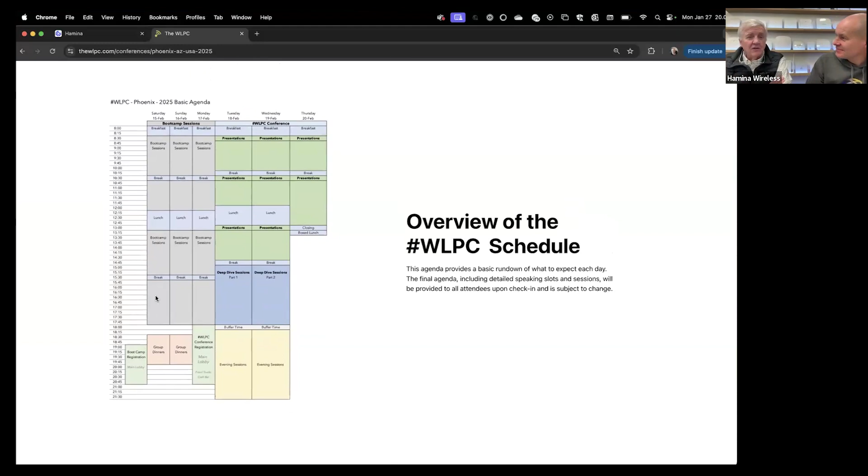Oh, WLPC, excellent. That schedule is not right, but anyway, it's just the generic one. But it's essentially a 6-day conference, boot camps on the first 3 days, and then 3 days of full-on conference with deep dives in the afternoon and lots of events in the evening, including a Hamina event in the evening that will be a better deep dive into the things that UC does. He never releases new information, but maybe he might this time. Yeah, never happened before. So we'll actually have a surveyor bake-off, like who's the most efficient surveyor type of competition during our evening event.

I should bring my Segway. Oh, dude, isn't that cheating though? You totally should though. Yeah, if you have room. You could bring Joel's scooter. Oh, Joel totally should. The pink scooter. No, I can't. That's my daughter's. Oh, okay. Yeah. She'll be mad. Oh man, yeah, we won't do that.

But yeah, Hamina has a boot camp, one of the 3-day boot camps. Do we? Yep. Yes, we do. Eddie Ferrero's teaching the boot camp, his first boot camp as well. And then we have a deep dive. We actually have 2 different ones. Jerry Alla, featuring the rest of the Hamina crowd, will be doing one, which is like the standard Hamina power through, and then Peter McKenzie will have different survey methods and mixing and matching them using Hamina. And seeing Peter's, it has some more advanced features too, so looking forward to that one.

So should we start with those tips? Because we're already 5 minutes in. Well, that was actually many tips. We can count those. Those count. The conference is totally a tip. And why? Get in early. That's a good tip. Yeah, absolutely. Here's another one. If you're going to buy stock, buy low, sell high. That doesn't sound obvious at all.

Not at all. So yeah, I think I've seen this floor plan before. Oh yeah. In one of your webinars, maybe. Probably. So first thing you mentioned today, maybe requirements. Could that be something we should work off of? As a good tip, make sure you know what you're designing for, but not just the simple requirements that you see here: primary, secondary coverage, co-channel interference, how much you don't want it, but like which AP are you going to use? Yep. Like, I think when you design here, you should use a generic AP, not. I was gonna come to that. So for secondary, we have a pretty strict limit of -67. What do you like to use?

Actually, while we're here, a tip is if you have secondary, it helps with voice grade devices and helps with roaming. But if you're near the edge, the perimeter of your building, it's okay not to have secondary there because no one's walking through the exterior wall. Exactly. So don't think it has to be 100% coverage. Think of maybe a couple meters or more around the perimeter doesn't need secondary. So don't overbuild just to get the secondary fully to the corners.

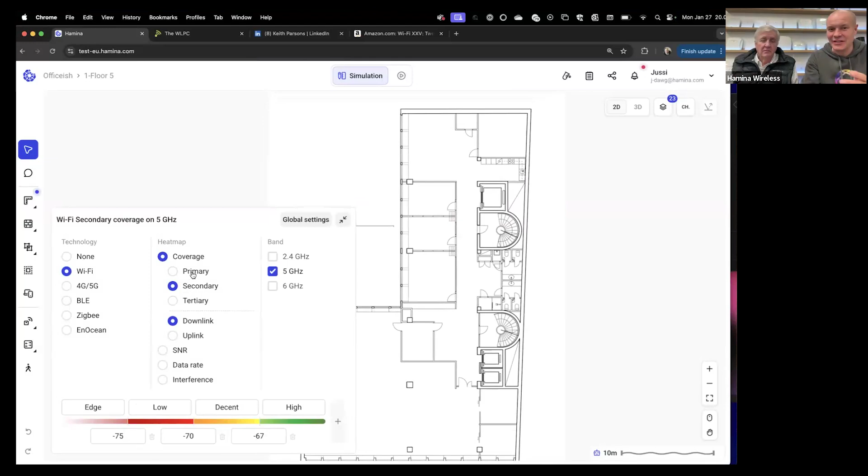And the secondary coverage obviously means, whereas primary is the strongest access point signal, secondary is, can I hear two signals, and at what signal strength the weaker access point is audible, right? And I like that you added tertiary, because if I see tertiary, it gives me this warning that, oh man, I'm going to have trouble with co-channel interference. Yep. Because if you have -65 tertiary, you probably have too many APs. Probably, certainly if you have all 2.4 radios enabled, then it's inevitable. Definitely.

So should we count that as a tip? Yeah, turn off 2.4 radios. Yeah, at least most of them, or at least some of them. All right. Oh, you want these tips to be truthful. Oh, they can be sarcastic too. Okay. I mean, either way.

What about wall materials and things of that nature? How do you like to measure the wall materials if you can go on site and spend time with that? It's pretty easy. You have something that makes RF, and something that measures RF. You put the maker on one side of the wall, hopefully about 4 meters away, so you're out of the free space path loss curve, so it's getting a little flatter. Take a measurement on one side of the wall, take a measurement on the other side of the wall, subtract. Maybe take multiples along the way. Sometimes there might be something in the wall that you can't see. So if you take multiples, you'll get that worked out.

A good tip there is don't use a phone for doing the measurements, because when the phone is listening, it's usually scanning all the channels. What you really want is something you can lock on a specific BSSID, or at least a specific channel, so it doesn't roam to other channels. You get more data quicker. Right. Beacons come out 10 times per second, so if you have it focused on that, you'll get at least 10 data points per second, and then the averages work out a little better.

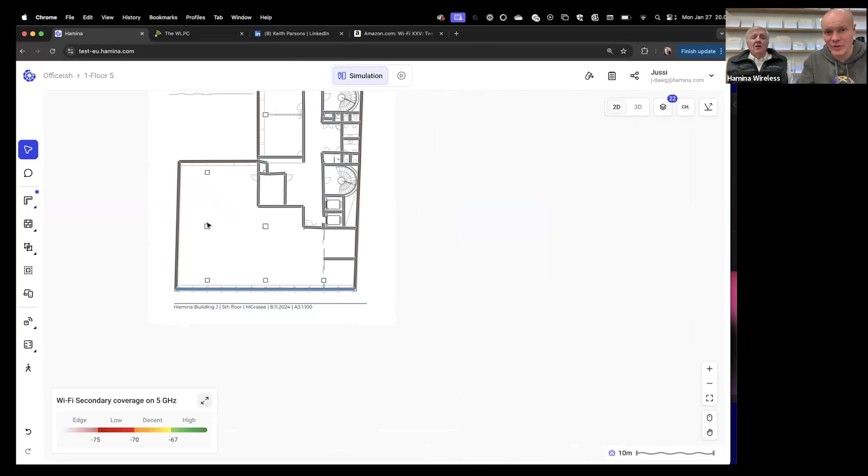There you go. And so if you cannot go on site, if you cannot do the wall measurement, what do you do? At least there's some rules of thumb. You can guess. And I would guess high if I was going to guess. And then I also like to guess low. If anyone's ever been in photography, good cameras have the ability to hold a button down for bracketing. In a camera, it changes your aperture or your speed, but basically it changes your exposure, up one stop, down one stop. When I'm doing designs and I don't know for sure what's in the walls, I'll bracket the RF attenuation of the walls. Usually the thing you have most of, which in a lot of office buildings is drywall.

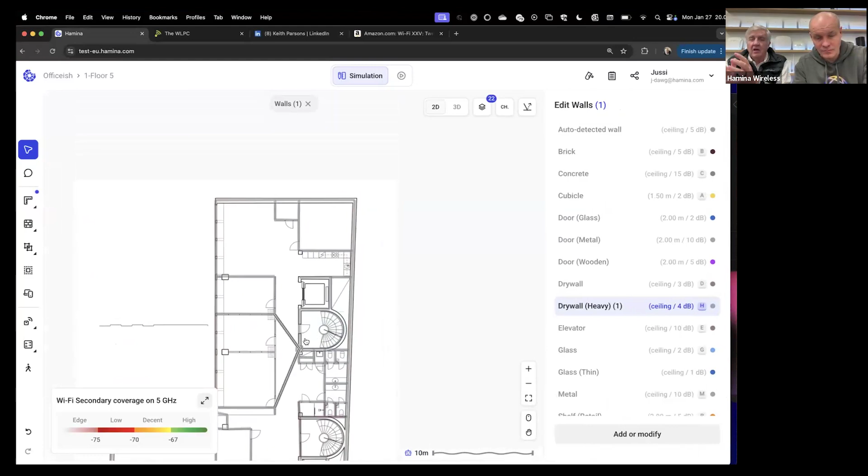And then I'll take it from a 3 to a 4 to a 5. And I don't want it to be too high or too low, because if I set it too low, I might have too few APs. If I set it too high, I might have too many APs to get past that issue, but then my co-channel interference goes up if it actually isn't a 5. So I use bracketing to get an idea of how sensitive my design is. It shouldn't break if I move it up 1 or 2 dB on the wall, and it also shouldn't break if I go the other way. So bracketing on your wall attenuations.

If you can measure, it's all better. I will just say right here in front of everyone, and you can agree or disagree: it's not always a 4 on the drywall. It's not? Amazing. So you can use it as a starting point, but it's also not there.

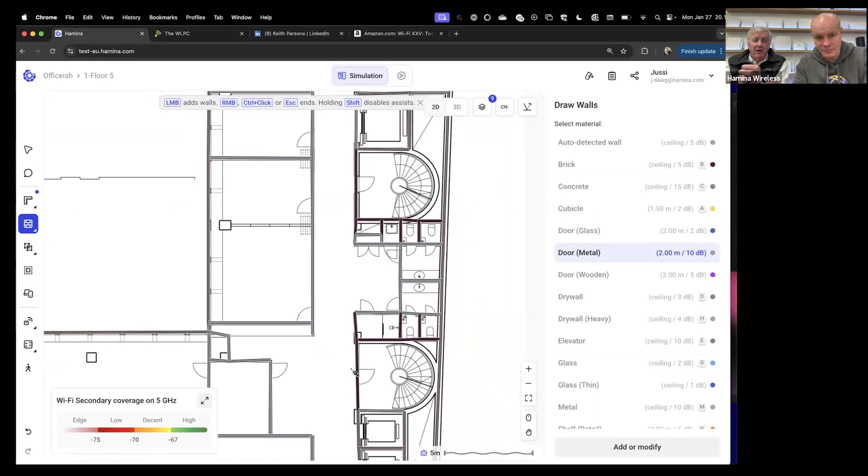Another good tip when you're doing these designs: treat your exterior walls differently than your interior walls. Even though you might have an auto wall and it brings them all in at once, treat the load-bearing walls different. The bathroom walls are different. Elevator shafts obviously different. Stairwells are different. So don't just have one wall type for the whole building.

Or you could just hire Dan to come in and draw all your walls and furniture. There you go.

Keith, can we ask a question from the Q&A tool? Yes. Okay, so David Stone asks, can you speak to insulated metal panel walls? I didn't see it on the list. What should I select?

When I talk to insulated metal walls, they don't answer. That was for Anders. I just did your dad joke for you. There you go. That's the useful advice we get from this webinar. And this webinar is done. Thank you.

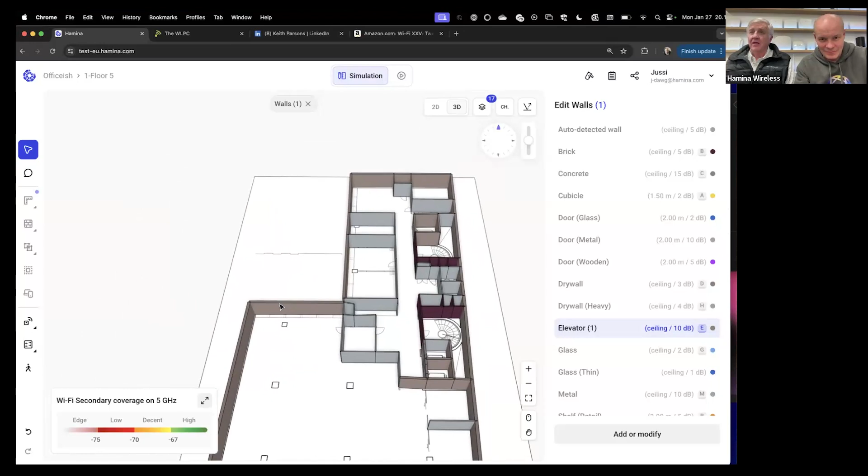I've worked with different panels of different types. I've seen them as low as a 6 and as high as a 30, a single panel. So if you can't measure it, what I do is I contact the contractor who built it or the architect who designed it. Usually the contractor is better, and see if they've used that same material in another building and go measure it there. So I might be doing one across the country and I don't want to fly there. I'll just find one local and test it. It's better because the range is so different. It will totally change your design.

You run across the same kind of things if you're in hospitals with radiation, and sometimes hospitals where they moved the radiation clinic to a different place, and they didn't take out the walls. So good to find those.

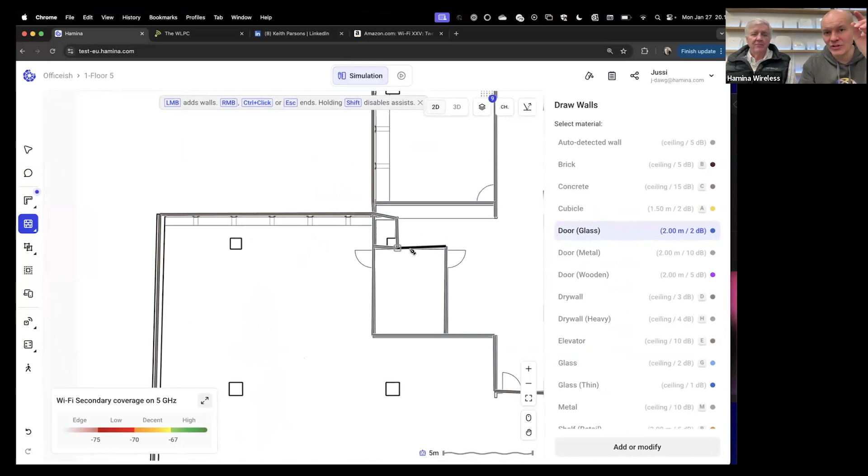And I like to use pessimistic values for walls. Especially here you can see that people typically don't draw things like kitchen furniture or bookshelves, stuff like that. They do attenuate it quite a bit. So being a bit pessimistic on the materials helps. However, reflections on the other side compensate that pessimism a little bit.

Same with columns. I've been doing this for years, and there was a time when I would draw a column, and then I would go in the real world and find the column didn't have the effect that I had predicted. So let's illustrate that. What if we do a mega attenuating column, something like 60 dB per meter, all the way to the ceiling? There we go. Let's draw a couple of those and illustrate that effect. Now we'll come to the AP placement as well.

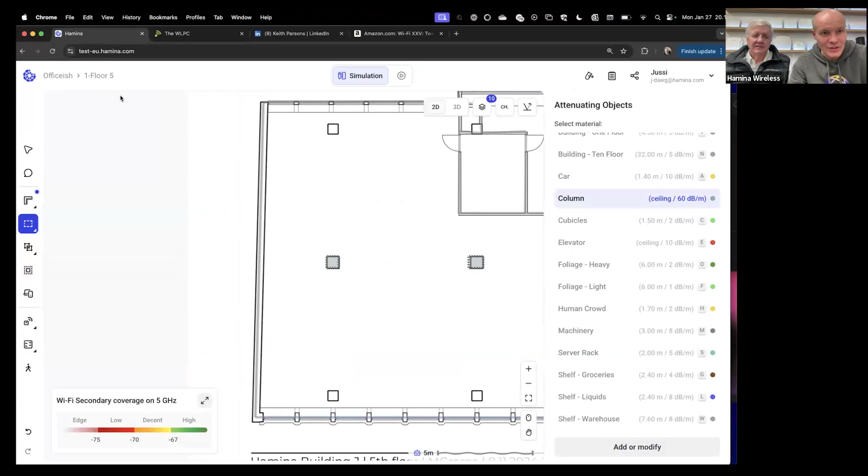So what would be our weapon of choice today? Xeris. Okay, just got me. We'll just use something Wi-Fi 7, and here we go. Show the coverage. I'm not showing it though. You're on secondary right now. Oh, no wonder.

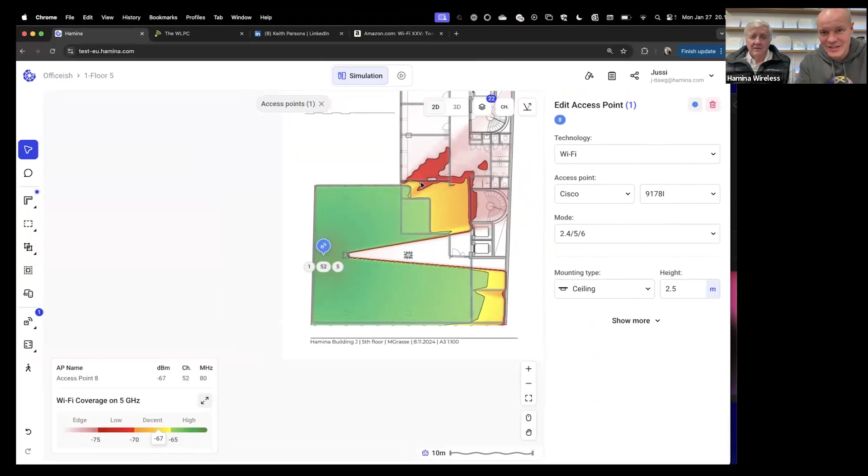There we go. So this is a not extremely realistic column, but this is what used to happen, right? And this is why we don't model columns unless we also account for the reflection. So you can see still behind the columns there's a little bit, and this is what would happen probably. To prove that your code is working, mount that AP on the column. Just to the side, like you face mount. That's what's in the real world if you mount one, even with your reflection calculation.

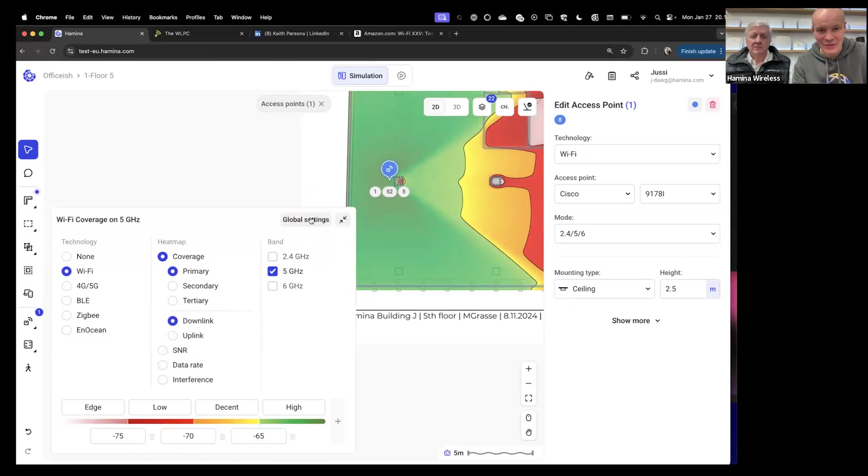So one tip is try what you do and actually do it, and then walk it, and then you can compare. Absolutely. And it also depends on what kind of environment you have. This is where it gets difficult because it's so difficult to measure reflectivity and refractions. I like the idea of reflection, but unlike attenuation, I don't know how to measure it to put the number in. So I like adding it, and some smart people have figured it out, but if I'm on site, I don't know how to put the number in.

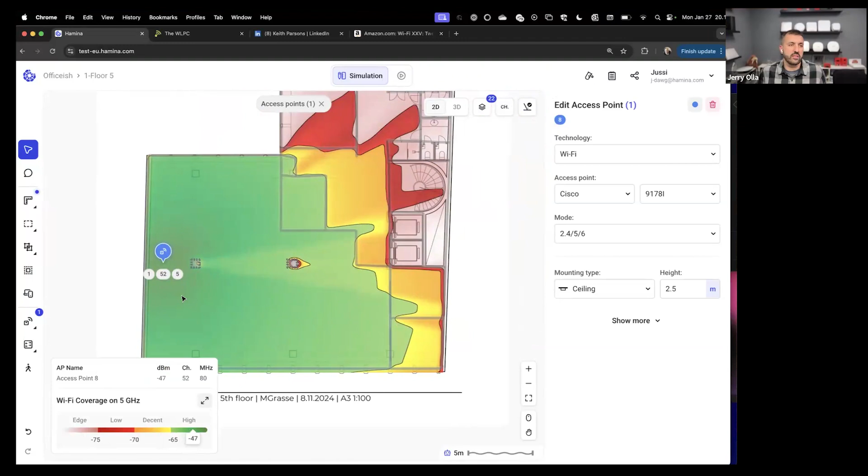So here's a bit more conservative view of that, just reducing the effect a little bit. But yeah, there we go. What I think is interesting with those is if you take that AP, put it back up against the column, and just move it a couple feet off, and then rerun that test of the reflections, notice how big of an impact it has, whether the AP is 1 foot away from the column versus 3 feet or 6 feet away. It makes a drastic difference.

It does, and this to me does reflect a reality. Ooh, nicely done. But you're right, Jerry. It does make a difference, just that little bit.

A lot of people have said, well, don't put an AP too close to anything that's going to be a wall or whatever. In fact, I was at a site last week where they said, we don't ever put APs closer than 3 meters from a wall. I'm like, so they're always in the middle of the room? And they're like, yeah, because they thought this had effect. Once you actually model the rooms correctly, you can see that it doesn't have that effect most of the time. Exactly. All right, we'll just leave it there.

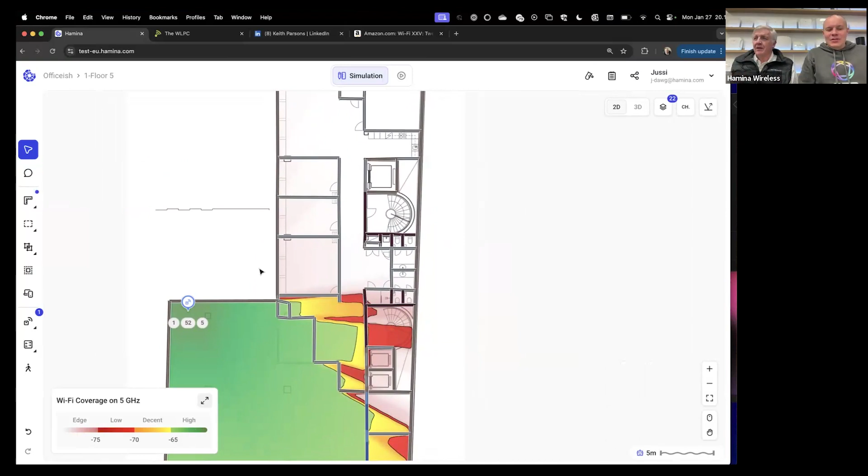Anything else about the floor plans, the walls, the structures, things like that? Yes. Jim Palmer asks, can you show us how to build custom walls in Hamina? Excellent question. Let me just get the Zoom stuff out of the way. You would go into the add modify of the wall table, and here what I like to do typically is take one of the materials that is pretty close to it and then just duplicate. Then we could put in hanging silly wall as the name. Let's make it a brick material. We'll make it fairly attenuating.

And then we would say it is actually 2 meters from the wall, so 6 feet 8 or something, and we'll make it transparent even and black. So this silly wall should be hanging from the ceiling. If you draw one and then go into 3D, you can see what it looks like. Let's take a look. Here we go. Silly hanging wall is coming up. There we go. Silly hanging wall.

Isn't that what you have your APs mounted to? It kind of is, and in reality a lot of the ceilings are like this, aren't they? They have a lot of structures and things like that. I was at the Maxi Hotel most of the days last week, as was Dan Jones, and in there it's a huge slab of concrete, and a lot of the concrete is not fully built. So in the ceiling there's pillars of concrete everywhere, and the APs are always stuck into the highest place of the ceiling, so they're not audible quite as far as they could be, which is actually probably a good thing in that environment. And you need to be able to model it.

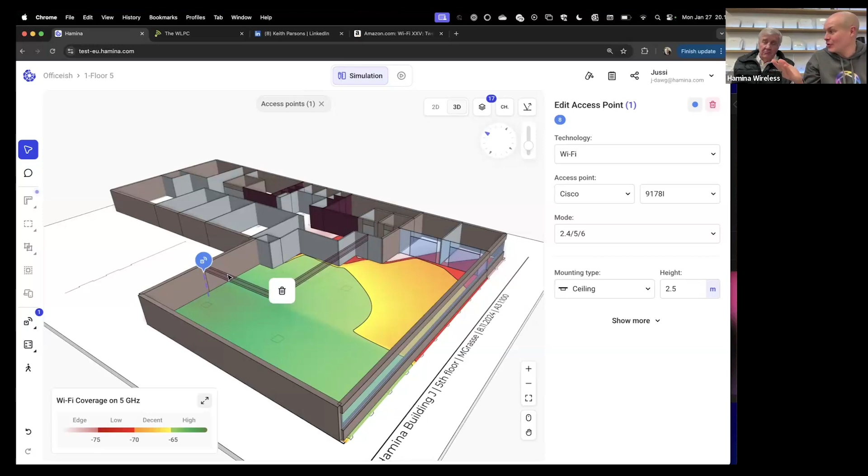Yeah. So having been here now, Dan, you need to come back, check in the office, and all of the raceways where the cables are, they're hung low, so you need to add those in your model now. That's Dan's homework. I'm on it. There you go.

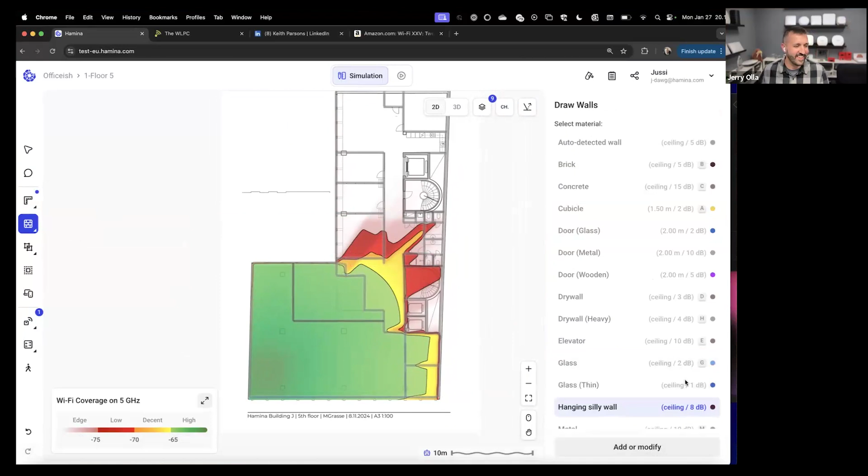Any other questions from the audience? On this topic, this is one I was just working on with some customers in Slack recently. Can you draw a lower wall underneath that upper wall that you just drew? There's one caveat; I'll let you do it first and see what you run into. Yeah, I've done this, before we had windows and stuff like that. I'll just put another second silly wall here, and I'll remember to press the duplicate button as well. So basically, it'll be an opening in between the two walls. So what you're saying is I should do this, or like this and this and this.

So top height 0.5, and maybe we'll use a silly color for that too, like dark brown or red. Here we go. And when you start putting this in here, it's great when you're editing it, but then, oh yeah, it actually disappears. We have the automatic system that takes out the other wall. So the trick, you know what to do? Go ahead. If you hold down the disable snapping, whatever. Yeah, exactly. Now I recall.

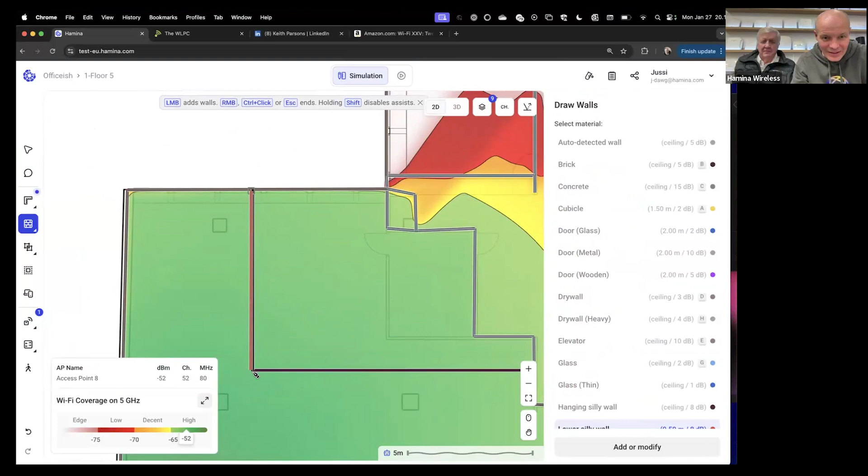Yeah, and there you go. I'll just disable snapping and put them fairly close, but not at identical locations. Hopefully I managed to do that. Yep, exactly, and it worked. There's a power user tip for you. Absolutely. Thank you, Jerry. Add that to our tip counter.

And luckily you don't need to do that with windows or doors, because if you use the window or door material, it kind of fills in. You can see how to do these also in the wall editor. It fills in this top of the door with the material that's closest to it. So it does try to have these smarts.

Same with the windows: you only put in the window material, but it fills in the top and bottom materials with the nearest and thickest material that's close to it. In that case, you could have made a window material with a dB loss of 0, and it would automatically be filled in, if the attached wall was already there.

Yeah. But essentially, here, if you say fill top and bottom and you leave one of these out, it fills the top and bottom with a nearby material. So it tries to be smart like that.

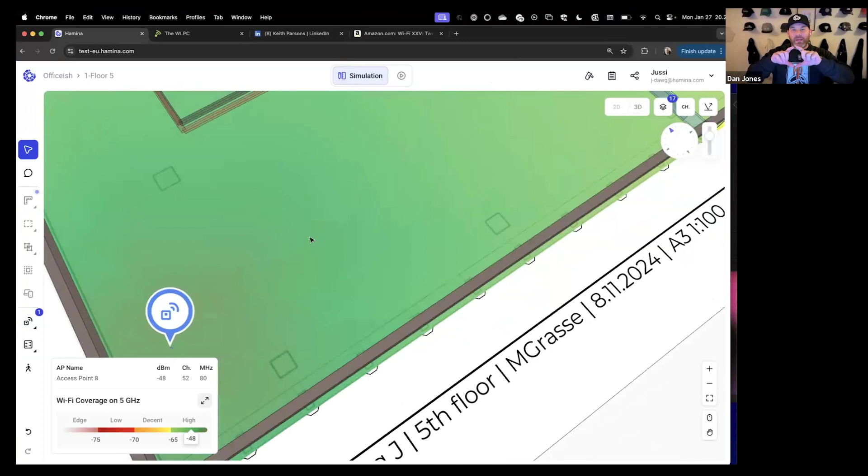Oh, the other thing that I've done as well is if you've got a space where you're trying to design screens, where they've got screens everywhere, actually do the reverse of that. Have a wall that's just floating in the middle and don't fill the top and bottom, and then you get a screen on the wall. Yeah, absolutely. Another tip.

Okay, is there a way I can have it learn walls if I've done a validation survey? So the case where you go and survey first, and I've collected data. The data points don't necessarily know where walls are, but they do know what the RF losses are. So let's take a look at that.

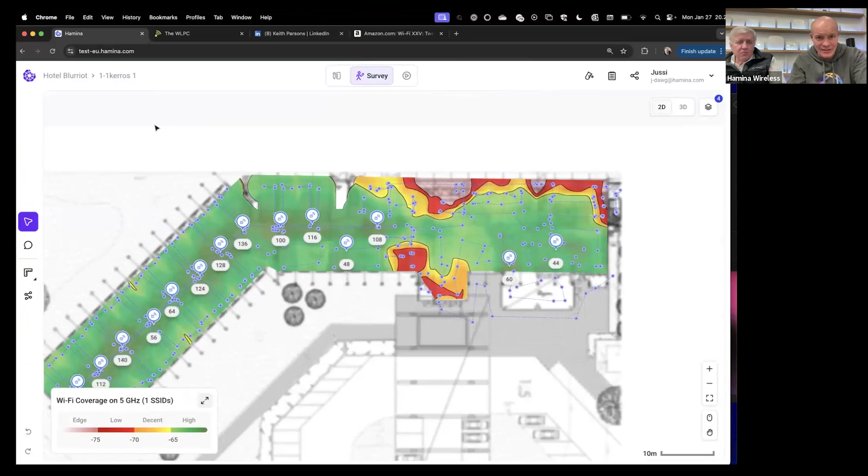So we'll go back to Hotel Blurriot, and what we've done here is just measure. Let's take the fourth floor. We've just measured this, and this is the first thing we do. Then we go out and remediate, maybe try to redesign, and sometimes it needs to happen at the site immediately too. So here's the survey data, what was actually measured, and it actually does transfer that.

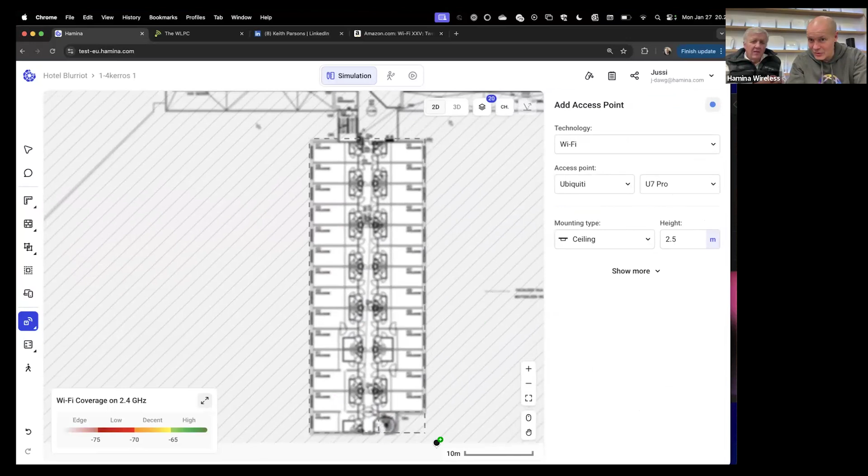Let's draw some scope zones to limit the signals first. There we go. And we'll cross out the staircase. The background is blurred on purpose. And then if we want to make a Ubiquiti network out of this, we actually can, and it automatically learned the environment based on the survey data.

So I don't think there's any walls. Yeah, there's no walls drawn here, but it does represent them, and this might not be as precise as a wall. You kind of have attenuation zones in between, but it's still better than nothing. And it is pretty accurate in the sense that this is based on the real environment, not guesses, but it doesn't learn the walls per se. It just learns the entire environment.

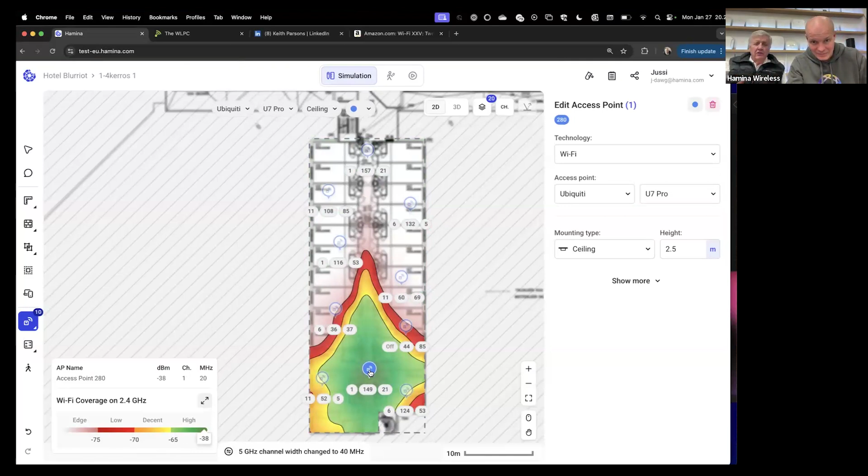Now, if only it could learn the walls automatically. Maybe we'll get that. Come WLPC Prague. Maybe. Perhaps. Who knows?

And here we can see an example, by the way, of the 2.4 disable thing. Because we have a pretty sparse network and pretty thick walls, it doesn't very aggressively disable 2.4, but it does.

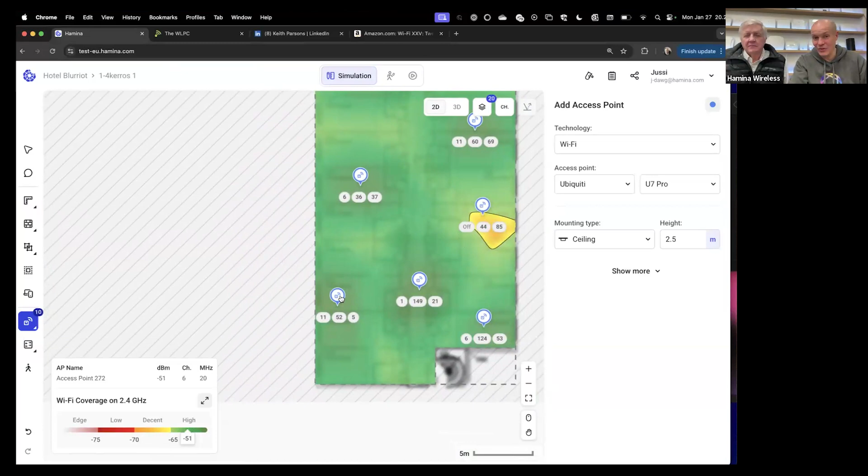So speaking of Wi-Fi tips, when you go to design your network, remediation or greenfield, what channels do you like to use? Or do you disable any of them? Like common practice, this is what I would disable in Europe, this is what I would disable in the US from the 5 gigahertz pool. From the 5 gigahertz pool, no, because whatever the APs are, they get it from the regulatory domain. Yep. And you're following that as well.

Yep. In 5 gig, I know a lot of people don't like DFS. I love DFS. They're wonderful until they don't work. And so you have to kind of stay on top of your log files to know if DFS events happen a lot, and it's not fun for the clients because they get pushed to another AP. It's not fun for your channel plan because they move around.

Then just remove those channels. Those channels exactly, only. Exactly right. Don't just turn all the DFS off because you don't want to try it. Yep. And it doesn't matter if you're by an airport or not. Somebody someplace made that up as a thing, and it's not true. Yeah. So check your log files and then only disable selectively.

I blame Andrew. What's that? That sounds like an Andrew thing, blaming DFS for things. Is that an Andrew thing? I didn't invent it. I just had to deal with it.

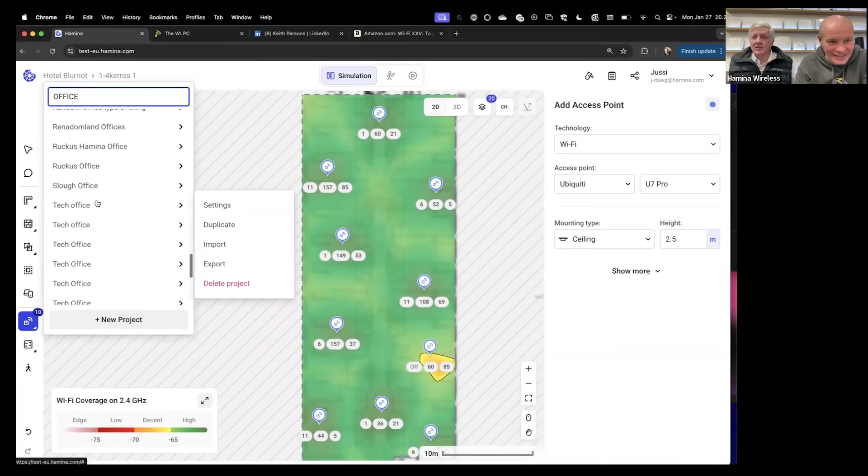Well, I understand, Andrew, if you turn them off, clients won't have that as one possible issue, maybe. But if you turn them on, it also doesn't mean that clients won't have other issues. So it's a balancing act.

What about cabling? Since we talked about these trays that go in the ceiling, how do you account for cabling in your plans? I kind of do the reverse. I like my cable installers to be trained, and I would much rather pay them to mount an AP than have a really expensive IT guy mount the AP. They're up there, they have the ladder. So I give them a little bit of training.

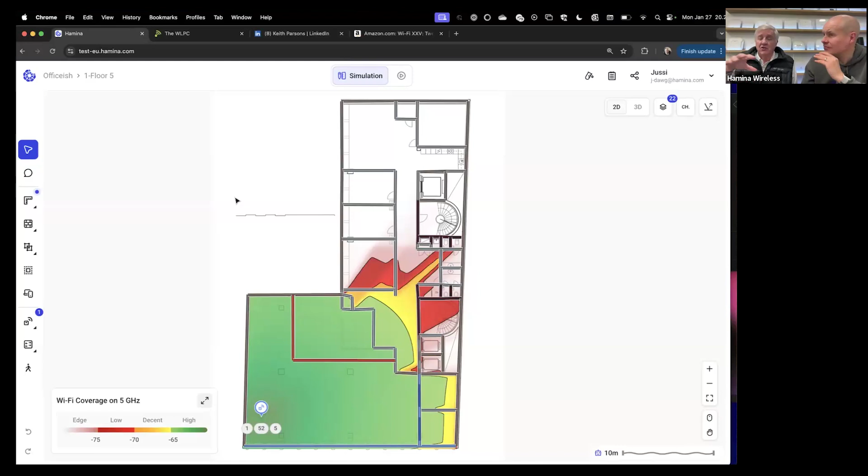For 95% of the APs, I give them some rules. It needs to be within 2-3 meters of this X, but you can move it anywhere in the room you want. And if I've designed a robust design, it doesn't matter. And then for the very few places where it has to be at this location, I can ask them to do that rather than make them do all of them. Because if you make them put every AP exactly at this perfect place,

that cable location might be extremely difficult to get to. And the cost to bring a cable to a place maybe only 2 meters away might double their cabling cost, because they have to punch through, core drill through something, and they didn't need to. So I like letting the cabler make the decision of where the actual endpoint is, but I give them rules.

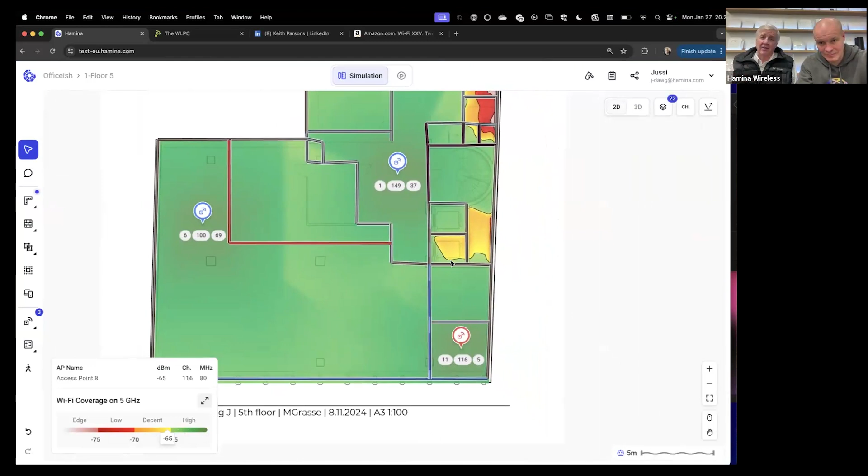Follow this rule, as well as if it's a K-12 or a university, I want them to rotate the AP and make sure that the lights face the door. So when I need to go troubleshoot, I don't have to interrupt the classroom. That's smart. So lights facing the door.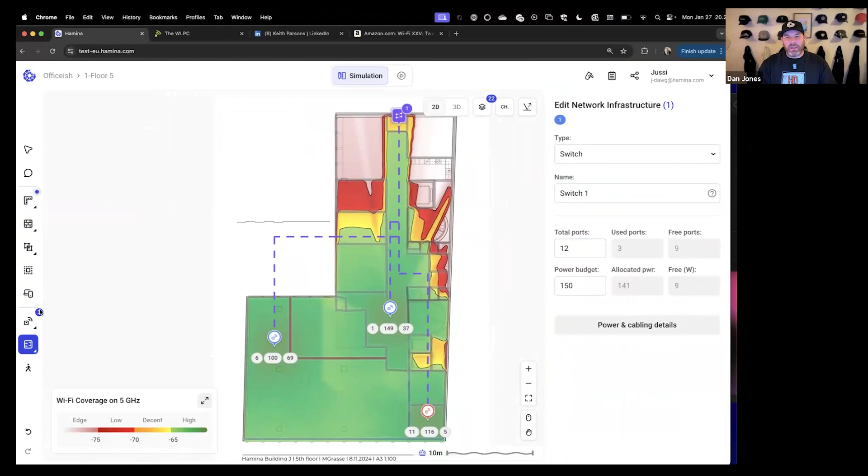So I have a really good example of this. I was helping someone with a design, and the architects had put all the cable trays in on their plans, for a building that hasn't been built yet. But where they've put the cable trays, they've gone the long way round something because presumably they can't go through a particular thing. But now the cable is like 180 meters long.

So it was really good to be able to show them, you're going to need to figure out a different route for that cable because that's not going to work. Oh, now you're going to show off your new cable tray feature. Yeah, the algorithms to actually pull these nicely and logically weren't as easy as a product guy like me would think. But what it does allow someone to do is just move the AP and the cable length adjusts appropriately.

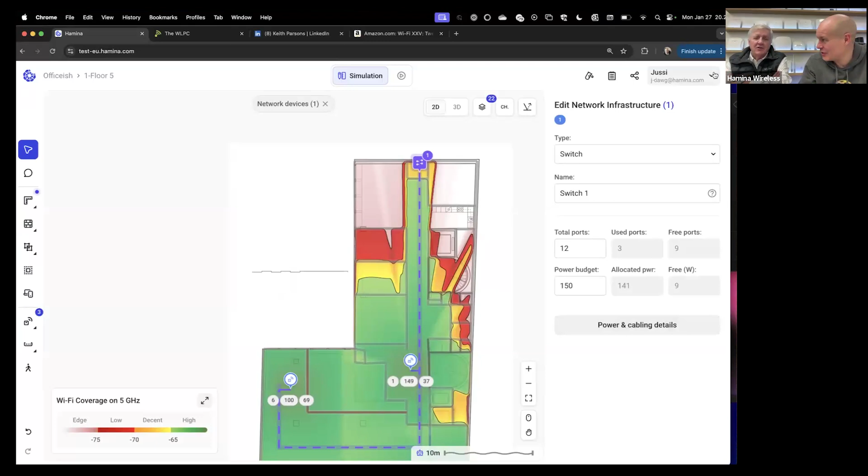Yeah. I've just found a lot of my customers don't have cable trays. If they're building a new property, yes, and then we love it. But with old stuff, you're like, yeah. Yeah, that's the shame. So this cable tool is wonderful. It helps. It's still a guesstimate. Yeah, absolutely.

And so maybe instead of 100 meters, I might only put in 60 or 70, because there's also the vertical component. You're taking part of the vertical component, but sometimes they go over, down, over, up, over, down, and it doesn't look that way on the map.

Your software thinks about the AP to wherever it's going to go, not that it has to go up and down around something. This is true. However, now let me just rename this as floor 4, for example, and we'll just clean it up a little bit. We'll just say it's floor 4, and we'll say this is floor 5, right?

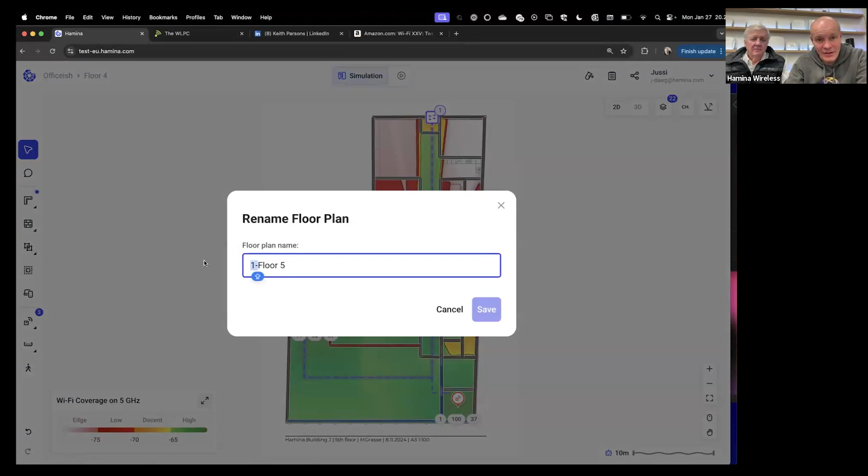I don't know if you knew, because this was pushed out. When was this pushed out? Yeah. We haven't even done a video or release notes, but it was pushed out last week or something like that, but there is now the cable riser. So you can take the... Oh, thank you.

Take this thing. I mean, I have to watch all your webinars to know what's going on. Dude, and even for us, like just today we woke up to the realization. Marketing asked, like, didn't we push cable trays out or risers out last week? And we were like, yeah, I guess we did.

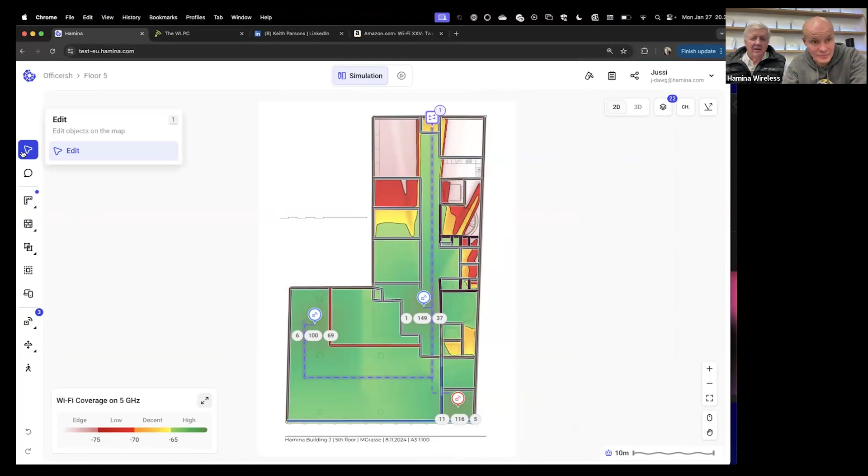So we could pull this to floor above, floor below, whatever you want. Which one are we in now? Let's clean up floor 5, and we'll just take out the APs from there. We can't. So we'll clean this up, and we'll say in floor 4, we don't actually have a switch at all. And then this guy, we say this cable riser spans through all the floors. There we go. So now, just create new ones since these were duplicated, as we start placing them.

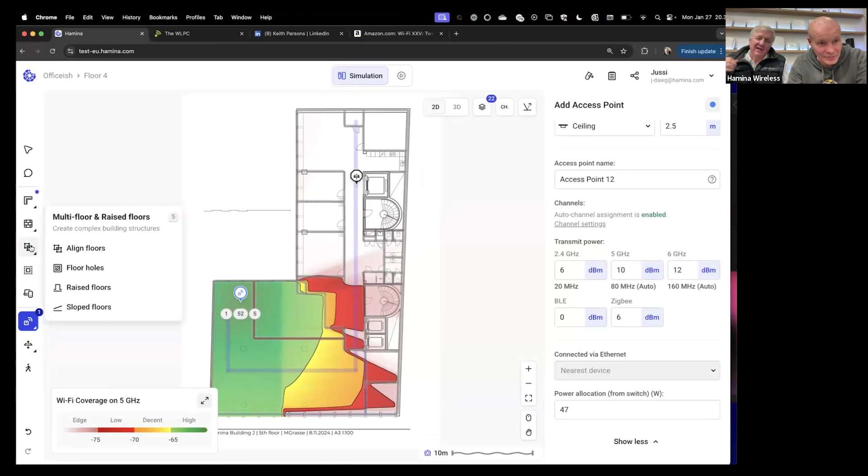You need to build the building first, don't you, see? Oh, I do need to do that, don't I? Because we don't have a switch here. Yeah, I'll just do that. That's another tip. Build your buildings first. Only then things can work. This be correct, this be correct. So from this floor 4, now we can see how the switch is on a neighboring floor, right? So the cable goes on this floor, this floor, this floor, up the riser, up, and to the neighboring floor switch.

Thank you, Dan. I got myself scared there for a while. Not that I wouldn't have extensively already used this feature, but I let you go long enough so I could see the panic rising. And then I thought, put him out of his misery. I feel very uncomfortable. And Dan, you know he is your boss. Just saying. I think in this company, it's just a justification to give me more of a hard time.

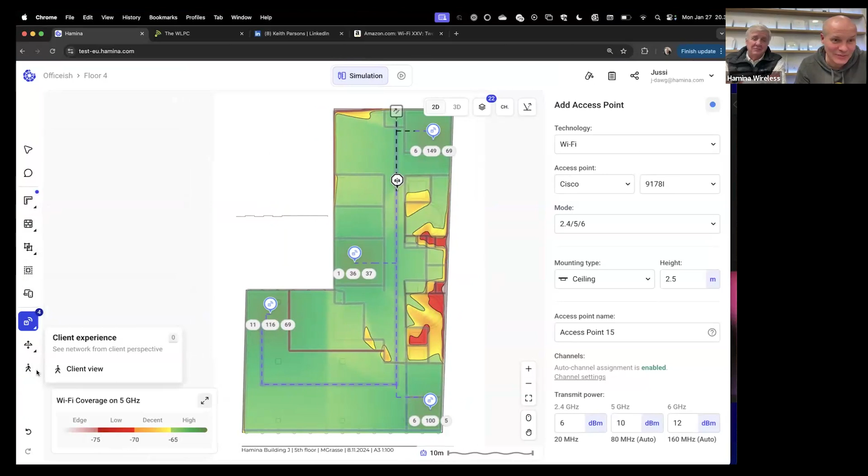But yeah, I think stuff like this is still fairly new, and it's still finding its place in the industry, and a lot of people probably haven't found it, let alone used it. But they're really useful tools for when you have a need. A lot of the tools and tips we've talked about are pretty generic across the board, but sometimes you come across situations where you need the cable, you need the switch ports, you need to say, oh, by the way, we also have to deal with all of the phones with their PoE draw, and usually that doesn't fall on us as Wi-Fi guys. And it's a nice benefit to be able to go to your customer and say, if you tell me what all those are, I'll give you a better report on what your switches need.

So going back to switches actually, how much have you done 6 gigahertz APs, let's say brownfield, switching Wi-Fi 4, Wi-Fi 5 to 6 gigahertz capable APs? Probably a couple million square feet. So how often do you refurbish the switches versus run the APs every single time? So no running 6 gigahertz APs on low power mode or stuff like that. I've yet to find people who are making that jump, at least in my customers, that have switches that can handle all the power. Okay, but it's not an option for you to run the APs, like drop a couple of spatial streams and stuff like that? Why would you do that? Yeah, only if you cannot.

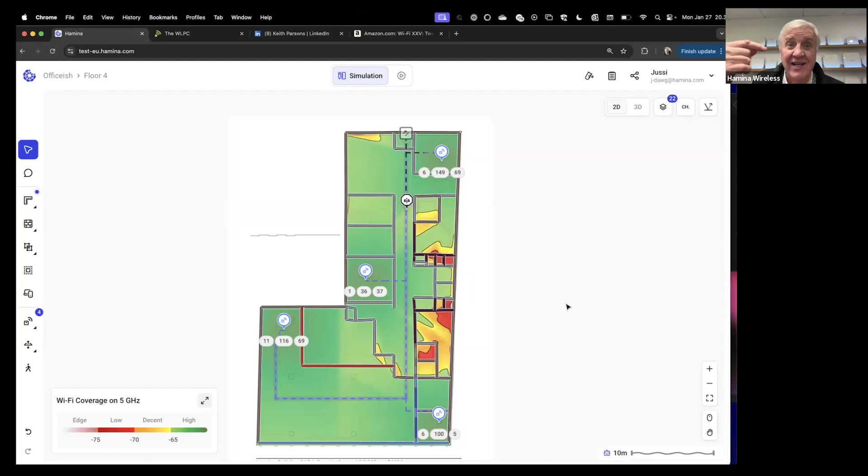You want to carry the laptop, or you want to do the surveying? I've done both. You walk and click, and I will just be nice and carry your laptop. Hello, it's me. If you see me bouncing, it's me. But you will be seeing my screen. I hope you can see it on the webinar as well. So let's take a quick status check first. Am I on two cameras now? Yeah. And we can see the utilization is decent, and all is going well.

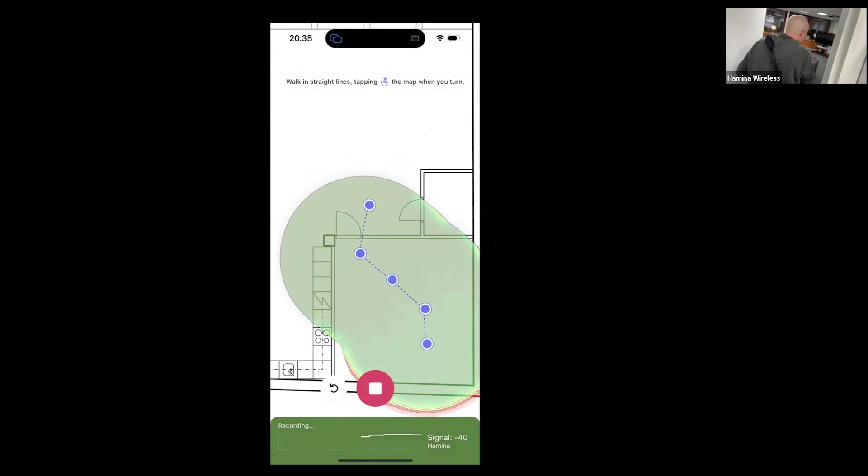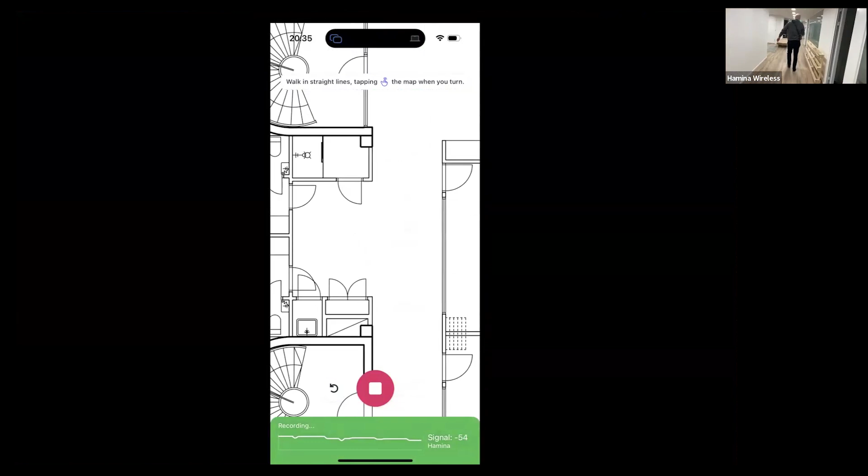All right. Has anybody ever done a live survey using two webcams on a webinar? That I don't know, but now we have. There's two of us following you around with laptops. I'm glad there's nobody at the office. It doesn't look weird at all, right? You should be used to people following you around with cameras, though, being such a celebrity. Yeah, this is true. Just another day in the life, followed by paparazzi. Do you want me to put you in the chair and push you? That's a bad experience. Is that a reference to the past? No, I would never do that. Why is there just a random pallet in the middle of the office?

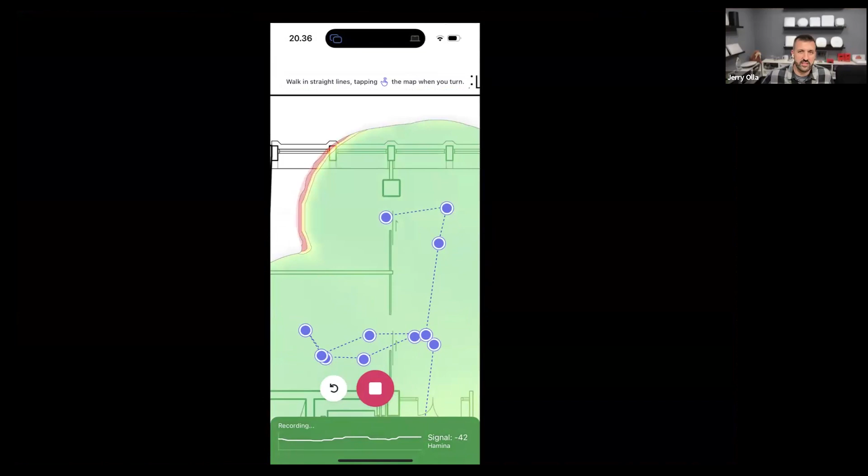Can you see my screen? Yep, still see it. Excellent. We're roaming around. How many times have we roamed now? We're getting the full tour here. Anybody have any tips for surveying? Continuous survey is definitely the fastest. Here's a question for the audience: what method do you prefer? Click every time you turn, click every time you arrive, or if you want to do it slightly more slowly, then we could take the line survey. This gives me the time to look at my bearings. Okay, there's the columns. All right, here we go, and just take one line.

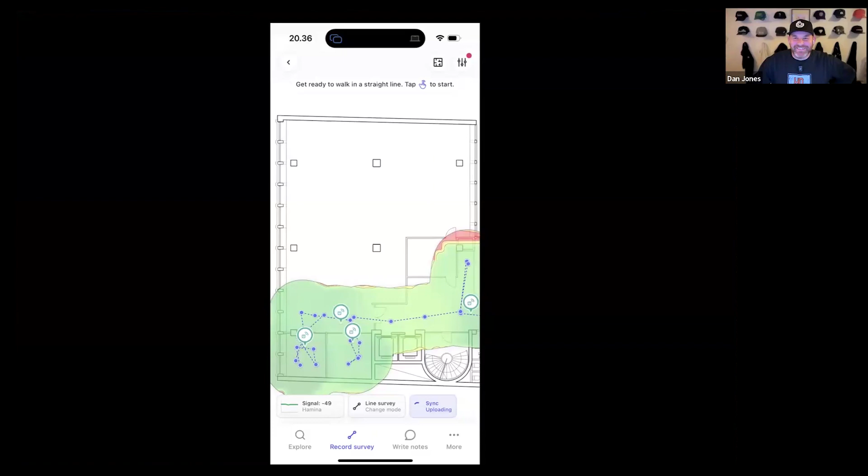Seamless roaming. Live demos, always great. We must get you over to DFS Helsinki. It's a DFS related event. Just for Andrew.

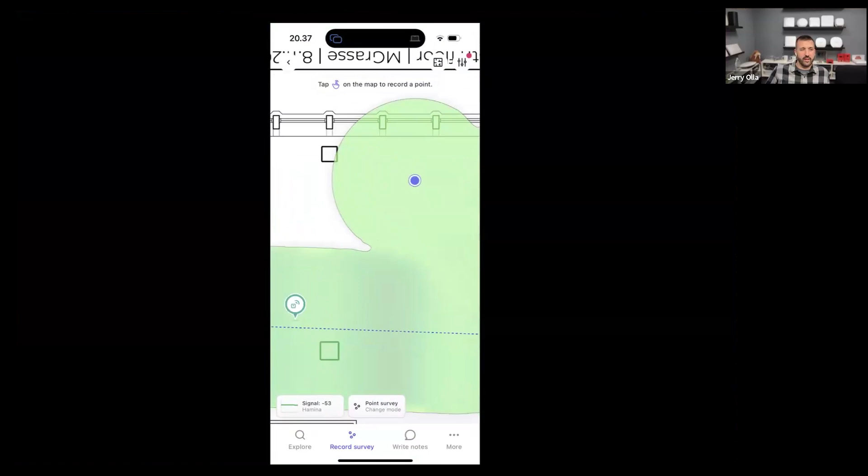And another point, see how I was changing the survey modes. First I was doing the continuous, which continuously gathered data, and now I'm in the point survey mode, which just takes one point at a time. Are we roughly here? I guess we are, and you can see the point being gathered there. We did experience a hard roam there, which I think is a good example of how laptops are not really optimized for roaming. It came back, but it was definitely a hard roam. It tried to hang on to the AP it was connected to as long as it could before it was forced to.

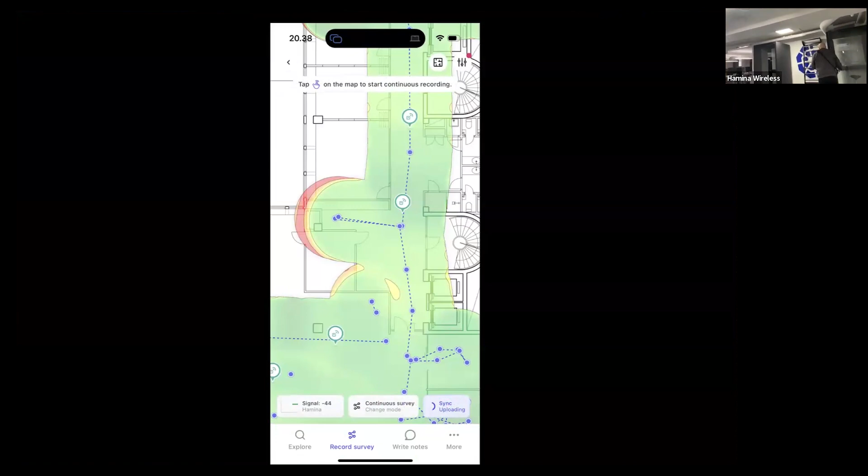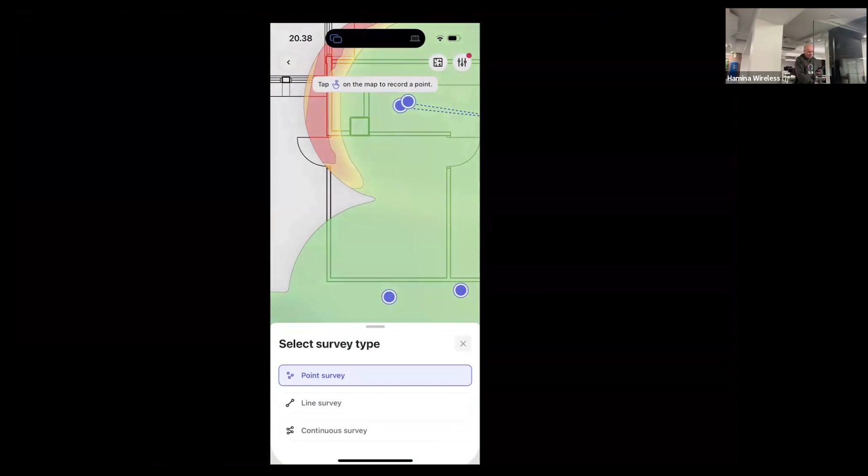So what do you guys use? Keith, what do you use as a survey method? Is it continuous? I like continuous because it's how I've been teaching people for 15, 20 years. It's the fastest and collects the most amount of data, but it also means you have to know what you're doing. It is the fastest. I like to use points for these kinds of places. Point survey is the easiest to teach someone else. Lines are someplace in between; it does take training, not as much as continuous. But continuous, I think, is really pretty easy. You just click where you start, click when you stop, click when you turn.

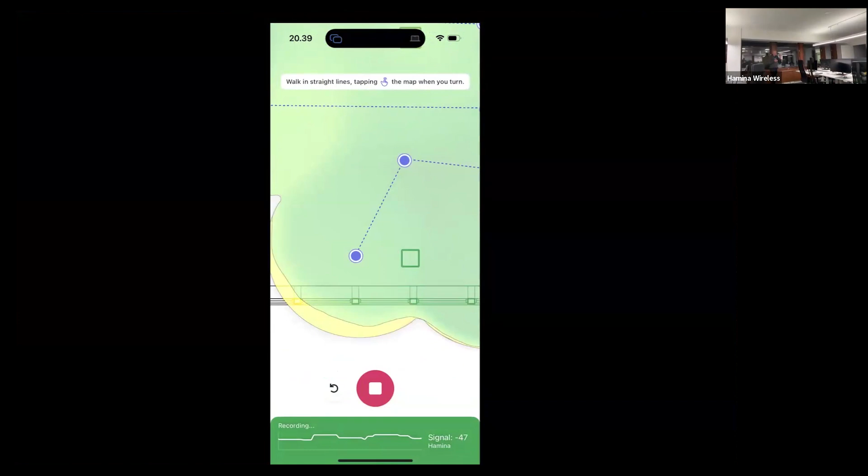Except it has its caveats, right? You have to keep walking, or you need to click when you arrive at the location to keep the survey going, and then you need to click in the same place when you leave the location. Right, that's why you click when you start, click when you stop. If you start again, click again. But it's not that simple, at least for me. So hard to remember. And now I stop again. I click when I arrived and click when I leave again in the same location. There we go. I'm doing a really sloppy job at this. I'd also say your feet aren't following the same path that you're doing on the map, because you're walking around.

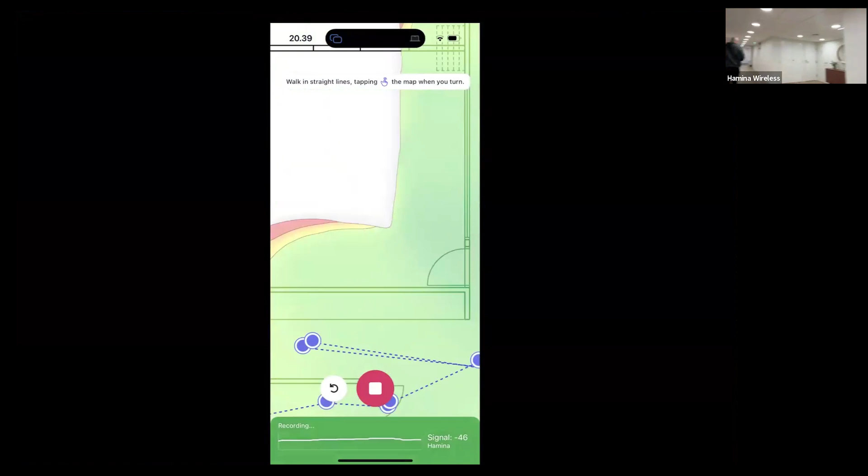There we go. Where did we lose Joel? We did not. Excellent. Joel's here. All right. There's the hard roam again.

You know what I'm wondering too, because he's mirroring from his phone to the laptop. I wonder if that's messing up the Wi-Fi roaming as well. Well, it's definitely having to channel hop, isn't it, for Apple Wireless Direct Link? So the laptop moves here to find... I love it. I've never done that test where I mirrored my phone to my laptop and then walked around trying to roam. That's really gonna mess up its roaming algorithm. I think that's one thing I haven't tried when I've been looking at Apple Wireless Direct Link: what's the effect as you're roaming. Fair play, that would be an interesting packet capture to look at.

Oh man, we lost it. There we go. Did we lose? They're back. Oh yeah, my Zoom went dark and everything.

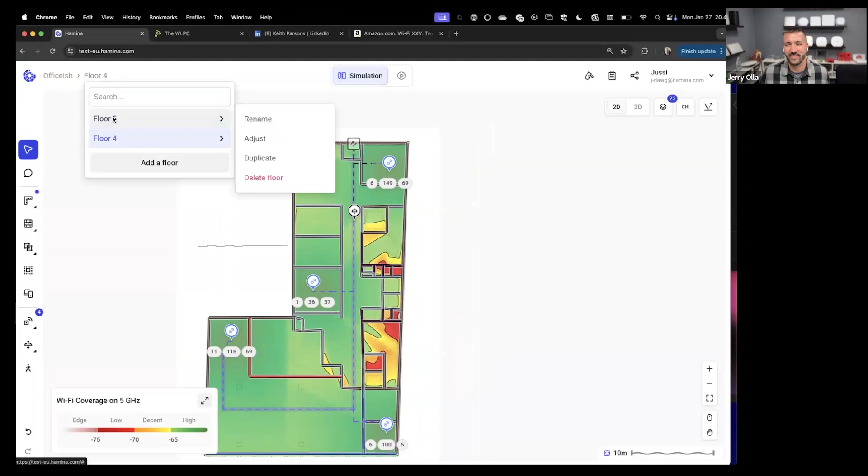Here we go. We were talking while you were disconnected there: I wonder what that does to the roaming algorithm, with you mirroring your phone to your laptop and then walking around with the laptop trying to support both wireless connections. Yeah, that's true. We were definitely pushing it.

Let's look at floor 4. Or which floor did we survey again? The floor that we're on. Of course, it was floor number 5. All right, here we go, and we'll take this Hamina SSID. So it's all uploaded here. No shortage of APs, that's for sure. Definitely not. I just filtered it down to just this SSID. But the total coverage is pretty good.

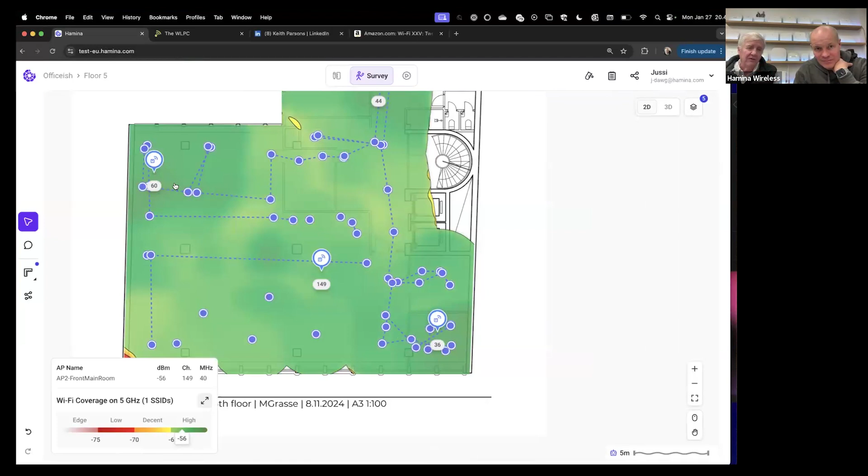And Keith, you were saying today you like to look at one AP at a time pretty often, right? The analysis. Yeah, each AP had whoever designed it. This is the flip side of doing the simulation, when you say, I'm going to place this AP, it's going to cover this far. That's what you think during the design phase. During the validation phase, you just do the thing in reverse. Did the AP in the corner give what I thought it would give? The simulation showed that one by Joel's desk covering that whole area, and now you have data to prove it did.

Absolutely. And now you would probably move these to their actual positions. Another tip: if you're doing a validation survey and you see the AP, walk around or underneath the AP. Usually directly underneath the AP isn't the strongest; it's someplace close. I'll just pass by it to give the software as much data as possible to place it where it is. Because the AP may do a donut pattern and have a little fade right underneath, but if you walk a couple of feet to the side, it will place really close to where it is.

Also, careful on the transmit power column here, because we show what is reported in the AP beacons, but that may vary depending on the vendor. For example, Juniper shows it for the single transmit chain. For Aruba, it's EIRP, including the antenna, so there are different ways to report it.

Okay, now do the cool thing. Hold the shift key down and show two. Yes, if you want to select multiple, you just hold down the shift key.

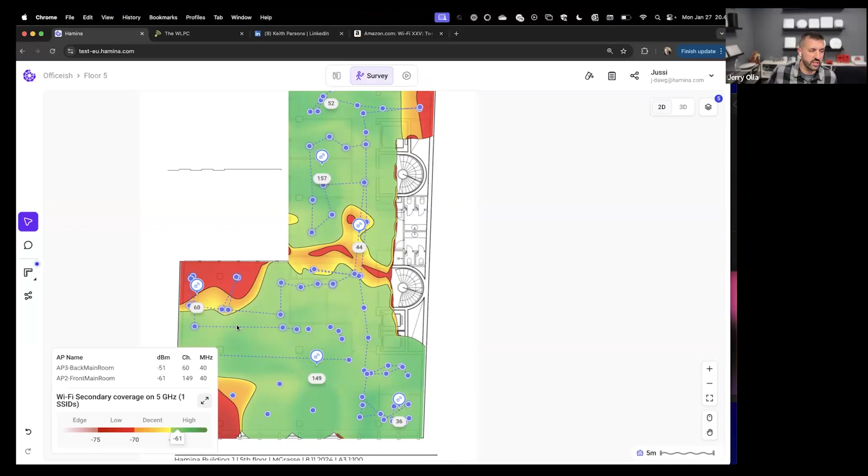So Jerry, what's your tip? On the AP location, here's kind of a pro tip: what I've actually noticed is if I do a survey and it is a complete, thorough survey, but the AP location is not where it is physically, it's generally a good indication that there is something wrong with the AP, like the AP is not mounted correctly, or is buried above, next to something metal, or there's some anomaly that's causing the algorithm to not be able to figure out where the source of that signal is coming from.

And often what I end up finding is there's something wrong there, right? Either with the physical installation or the AP is not performing as it should be. So it actually warrants more investigation, not just, oh, let me physically move that AP to the right location, but if it's way off, that usually warrants some additional physical investigation.

I have a question to go along with that tip. When you're walking and collecting data, I can take a picture and save it onto the validation survey. Wonderful. Have you found it easier to do while you see the AP? I like to do it in 2 passes because I feel like I have to stop the survey, take a picture, restart the survey, and that's a long time to be in one place. And I'm moving my phone in different angles, which changes the signal as well. It's kind of a pain, but then you get the photo of where it is, so when you get back, you can move it to right where it was in the room.

From my side, I'd say it depends. In general with Hamina, because it is so fast to start and stop surveys, and so fast to add a picture note, I think it makes more sense generally to do it while I'm surveying. As soon as I see that AP, let me just document that. The reason I say it depends is sometimes it's very difficult to physically locate the APs depending on the environment, where I really have to stand there and look for it. Having survey data that shows where those APs are, it's sometimes better to do 2 passes, where I come back through already knowing the general locations. That's why I like the 2 pass.

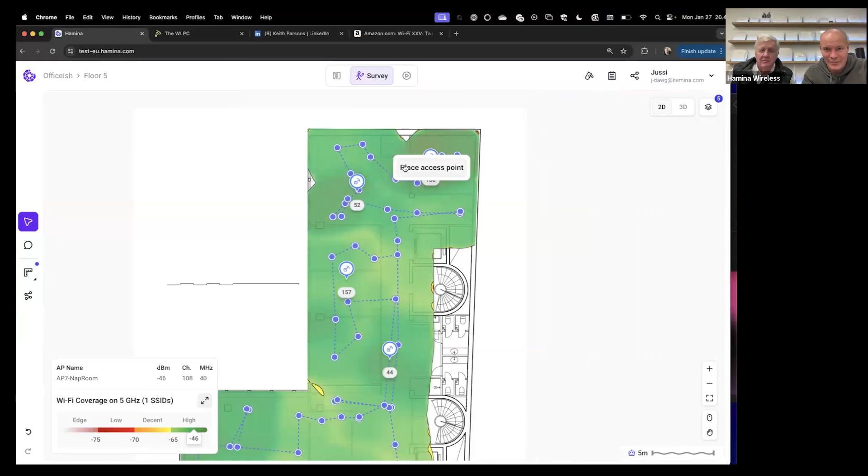And if you accidentally do get stuck with an AP on the wrong floor, you can always remove it from here, and then you can always return it by just right clicking on the map and bringing back the AP. So we can bring any AP. And what I think is nice about this is, let's take all the SSIDs here. If you need to place any of the APs, you can select the SSID, and all of the APs that are not placed on the map will show up here, shown by loudest first. So the most logical one is right there at the top for you.

So again, different ways to mess with your AP placements. Let's take this guy. If we move it, we can also move it back to its original location, where the system thought it was. So we can replace it back to its original location.

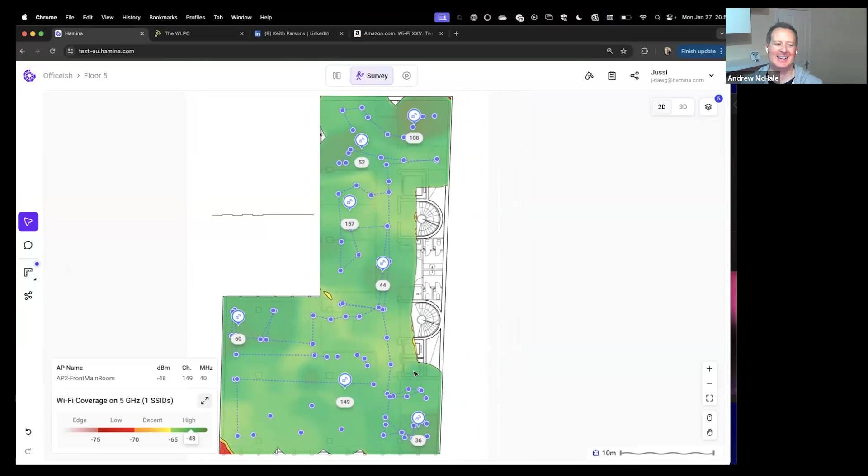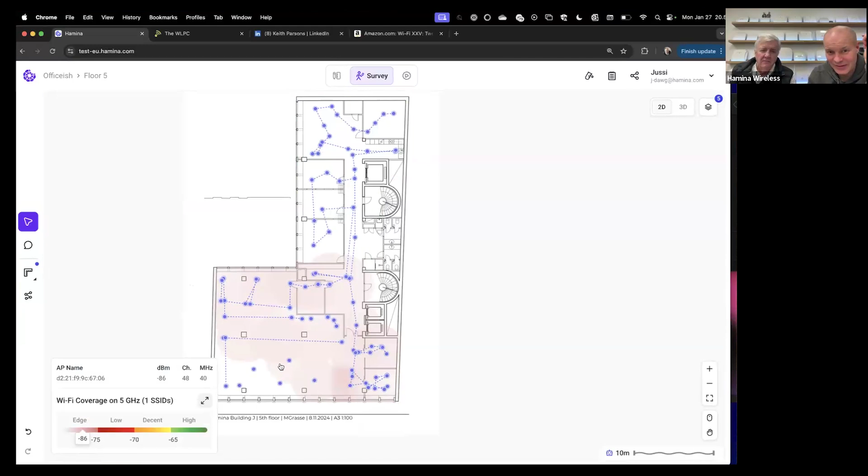Yeah, it puts it where it hears it loudest, right? So it's always pretty accurate. That's what I found. A lot of the time it's environmental things, like Jerry was saying, that cause it to not be where it actually is. But most of the time it's pretty good, especially when you're doing omnidirectional stuff. Also, a little tip, it usually places it on the survey path somewhere. If they get really weird and they're not near any survey path, that's another telltale sign that something else is going on. Or it's on a whole different floor or a different building even, and it's just as close as we could get. Here we can see, for example, apparently there's a company called Fairchild somewhere in the building, but it's pretty weak.

Didn't place the APs on the map. What about Guest? Didn't place those. I guess it's pretty weak. What about Sponsor Capital? Just to go through a couple. Here, for example, Sponsor Capital is probably one floor above or one floor below, and they have a bunch of APs. So those were accidentally placed on this map because they're so loud. Yeah, 26 dBm transmit power. Is that even legal? They cover, well, not here.

Look what you found. Never mind. We definitely didn't name the company or anything. Anyway, we'll go back to Hamina and just be nice about it.

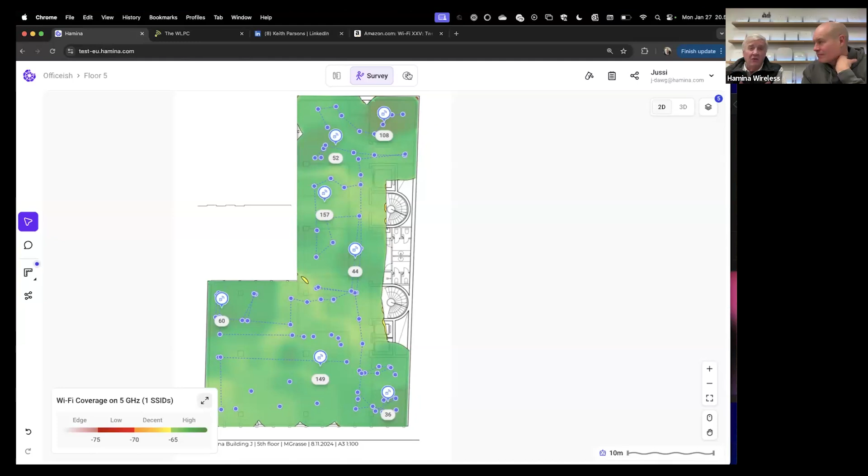But I think that's the point: when you look at the data one AP at a time, there's so much information you can learn. Yeah, really is. And when you see weird anomalies, just stop and look at it and ask, what could have caused this? Like Jerry said, it could have been hidden up in some metal something, or it could be on another floor. The other one I like is from neighbors. You can just see which side they come in on. Yeah.

And if you take the slider and you go weaker and stronger signal, you can actually see the direction of where. Yeah, that's true. That's very, very true. One more, I could. Yes, that was just one more tip. Just add them.

Yeah, I can actually share an example of that. I did a survey once on floor 2 and floor 1, and the AP was showing up on floor 2, but I knew it was on floor 1. They had installed the AP above this metal drop ceiling, and the signal was actually stronger on the floor above than directly underneath the AP. So the AP was placed on the second floor instead of the first floor. I think that was the case in what we just saw as well. They had the APs blasting full power on the false ceiling.

Again, I think the ones that were blasting down were underneath the desk, pointed down. Could have been under desk. Yeah, could very well have been. Dan, you wouldn't do that because you have a bracket to fix that.

Exactly right, I do. They still haven't put my initials in the SKU though, so I'm a bit upset about that. But let them off. We'll get them one of these days. But did they give you a hat? They did give me a hat. So you're done. There you go. Oh well, you totally couldn't see it because the cap was blurred. Oh, sorry. We will not name the Texas antenna company that starts with A and ends with X.

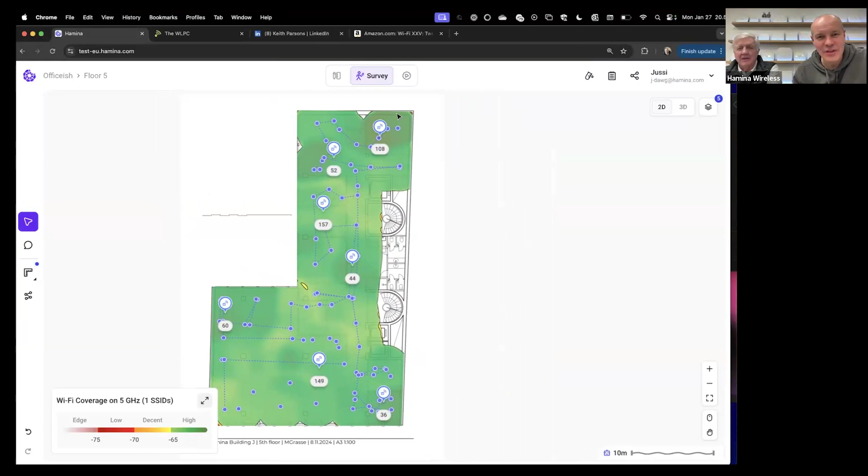I was thinking, should we take a look at the troubleshooting as well? You've written all kinds of courses on troubleshooting, and this is what we were looking at today. Let's bring it in. Just to recap for everyone who hasn't watched all of these, on this one you picked Meraki or Juniper. Yeah. So you have an API key on your end, you're calling into the cloud. In order to connect this, your cloud provider has to have an API available to you. Correct. And then you're querying their API to get answers back.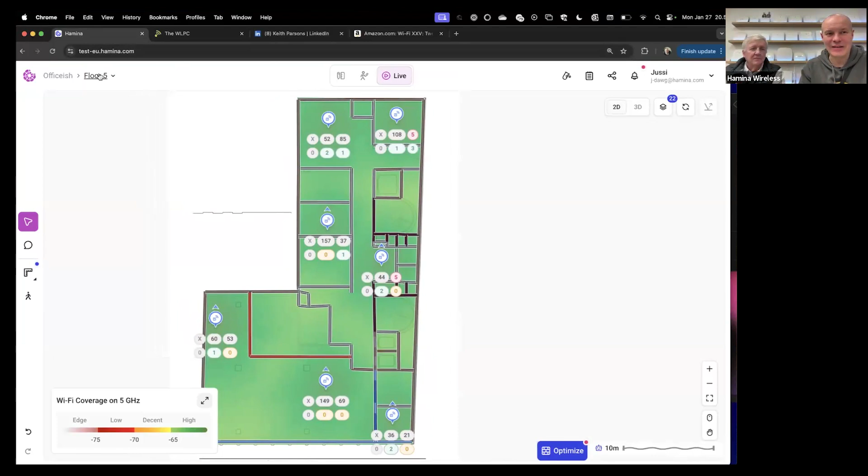Exactly right. Sorry, I went through it too quickly, but all I did was connect live analysis settings. I put in my API key, connected to the cloud, selected the site from my org, selected the map I want to tweak. And now here are the same APs as we saw in survey, in the live view, and we can see the APs, their current channels, how many clients are currently connected. For example, in this room, would you be surprised that there's 3 clients on 6 gigahertz?

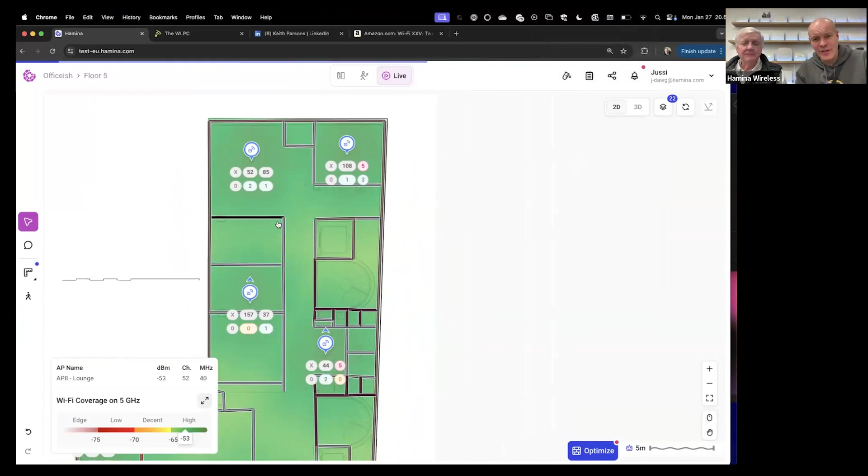Such as probably this guy. Mine, yours. Is this 6? It is 6 gigahertz, 80 megahertz. Well, why don't you tell me how my client's doing right now? Should we look at interference first, because the channel bubbles are red here. Oh, something's terribly wrong. It's those 80 megahertz channels. So on 6 gigahertz, because there's just 2 APs.

But this is where I have a more relaxed attitude to a little bit of co-channel than you do, probably, where you don't have a solution to this. Come on, you just need 1200 megahertz and you'll be fine. In Europe we're actually forced to live with a little bit of CCI. Or you could change the channel width down. Yeah, you could, but is it worth it? Joel did this just so you could have this yellow screen. Excellent, Joel, very thoughtful of you. But even still, 80 megahertz is still pretty good. So would you actually put this narrower just because of 2 AP CCI?

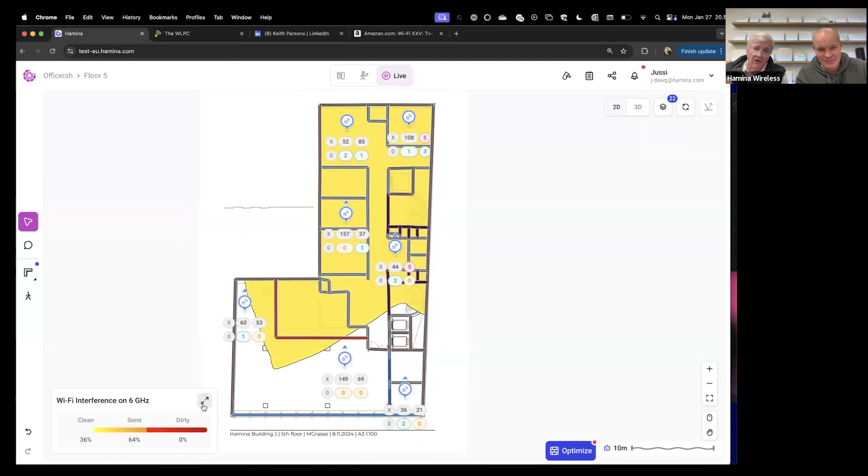I would, because I don't want to get called back later when someone says Wi-Fi is not working and the reason was it got overloaded. And I know this is going to cause an issue. It may not, but if it does, I will give them a caveat that says, we're going to do this because you think you're going to get more throughput on 80 megs than 40. So I'll give it to you, but I'm also telling you it's going to have these downsides. Yeah, exactly. People are enamored with wider channels.

But if you look at the airtime, the amount of time that's actually transmitted, a 40 megahertz wide channel, 80 megahertz wide channel, the time is nearly identical because most of the time is overhead. There's only a little sliver that's actually the payload. Yeah. But it gives you bigger numbers and people all like bigger numbers. This be true. Then again, you have a gig pipe here and I was pushing 600 or 700 meg through, so it might be a real thing here.

So okay, so what if everything shows green, including channel utilization and all of that? So yeah, that's good. But if Joel was still having trouble with his laptop, let's see what's going on there. Mine's right there. Hit mine. Let's hit yours. Now, what I'm doing on mine, and I'm pretty sure I'm not the only one who does this, I have up on my screen the Wi-Fi signal from Adrian Granados showing me my current channel. Oh, I have an MCS index of 11 at 1200 megabits. As do we the other direction, yeah.

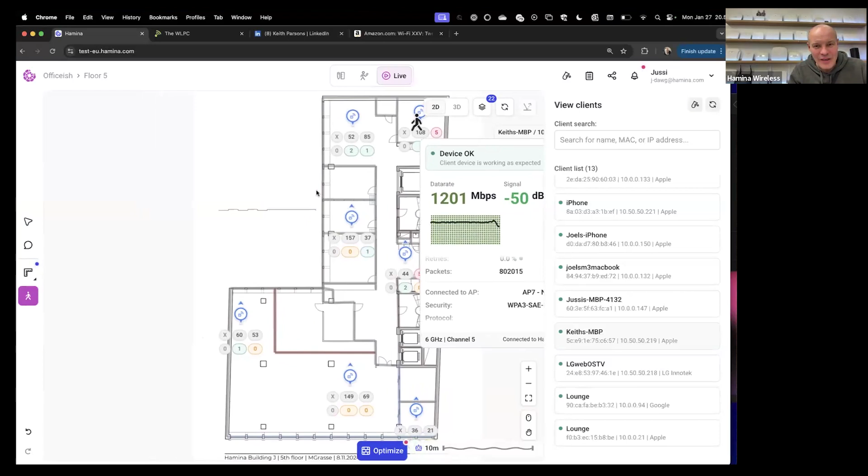There we go. So we can see Keith start to walk, and this is still in Hamina feature preview. So let's see how it goes, but it probably doesn't track the client in very real time. Let's see if we have pushed the kind of tracking when it roams and stuff like that. We should see the roam at least here in the graph when he switches APs. His RSSI is certainly getting lower. He's at the edge of his uplink coverage. Uh-oh. There we go. But still he hasn't roamed. The MacBook refuses to roam.

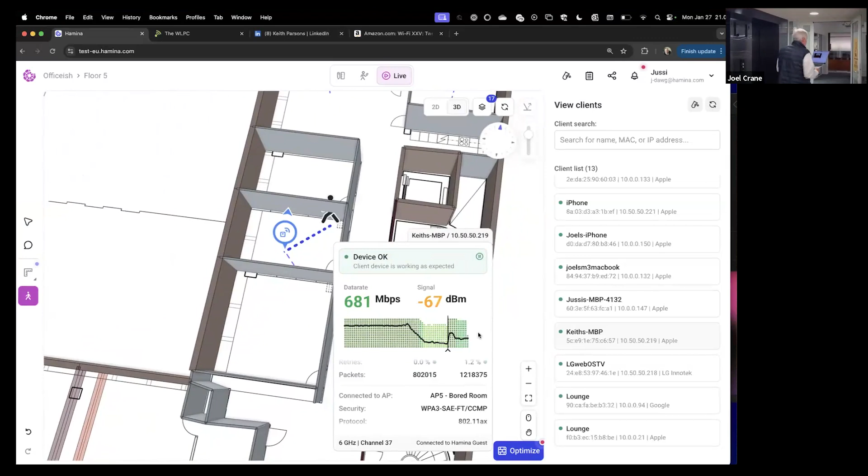We'll walk more. There you go, Keith. Excellent. He just galloped. Yeah, and the guy, roaming man, moved as well. So it is definitely getting there. He's coming back. He roamed. There we go. If you ran that same test with an iPhone, you'd see a very, very different experience. Yeah, that's true. It would roam a lot more quickly, wouldn't it? What are the thresholds? iPhone at neg 67, MacBook at 72, or 72 and 75. Oh, there goes Keith, roamed again. He's roaming so fast. Did you see how quick he moved there? Through walls and everything.

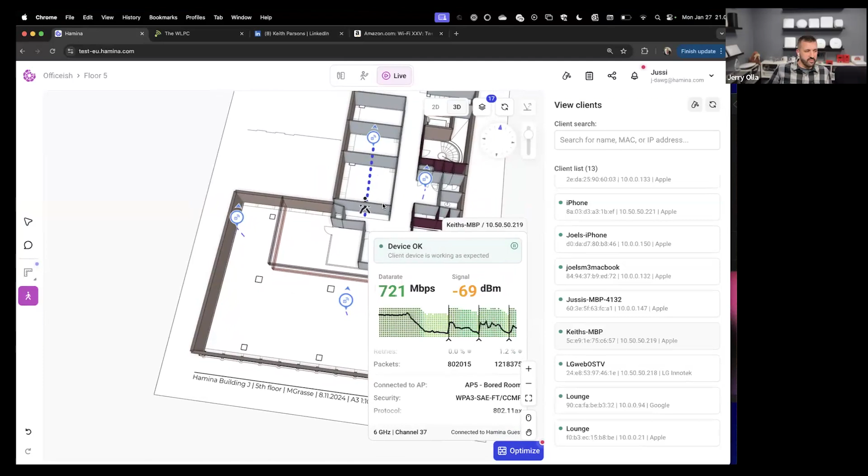Yeah, as far as the roaming algorithms, it varies quite a bit. You need to talk to somebody like Ben Toner to get some insights on that. He's informed me of some of it. Especially, it's gotten even more complex now with Wi-Fi 6E or 6 gigahertz capable devices, because there's a lot more considerations there of when it's going to roam and what it's going to roam to. So it's not just a flat decision making. Let's see if Keith roams one more time, because he's now entered the room, and he should be going from here to here. Oh, there it goes. Pow. And he's back. This is kind of cool, I gotta say.

Looking at them both, this in Wi-Fi signal matches the same thing we see here, up and down. I'm plotting MCS, but the result looks almost identical. Yeah, we're looking at Keith's screen, what the laptop saw and what the AP saw, and there's definitely a similar trend there. But I don't have the little lines of roaming. You've got roaming lines on there. Very nice. Okay. And now I'm stable again and I'm happy.

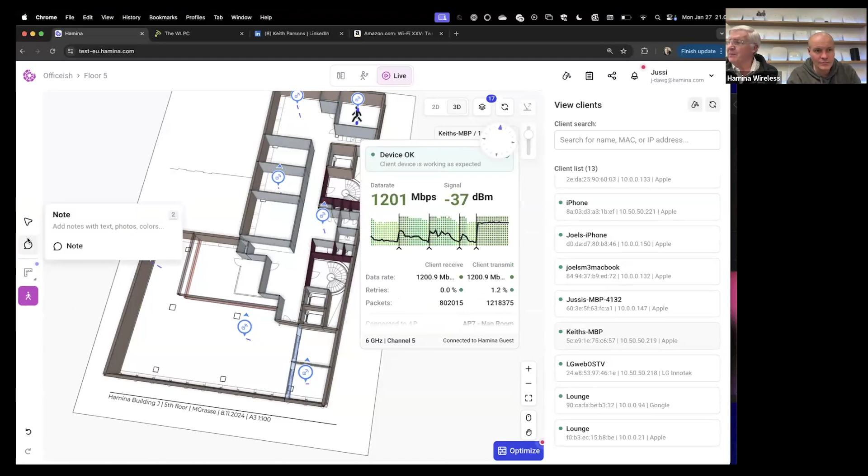There you go. Keith, you've done a lot of courses on troubleshooting for Wi-Fi, and you have a brand new version of the checklist, don't you? Oh, yeah. You want to share? Can you send it to me? To end the webinar, we could take a look at that real quickly. Yeah.

Because that will give us 25 more tips. Just like that. Woohoo! Yeah, we'll definitely go over the promised limit. How much did we promise? 50? We've at least given 25, so we'll be good. And we're not gonna count the fact that we did go over the hour instead of 50 minutes. But we should probably try and answer some of these questions as well. Yes, sir.

Questions. Oh, here's one that you could have some tips with as well. There was a question around warehouse type environments and recommendations. I don't have the question in front of me anymore, but let's say it's a 32-foot high ceiling warehouse. What's the recommendation for the height of the AP? In their example, they said, should the APs be installed at something like 25 feet, and what kind of impact would that have?

I've been at this for many years and done lots of warehouses, some higher than 35 feet. The problem is, if you use Omni antennas, 35 feet is a bad thing to do with an Omni antenna. So the 35 feet's not bad, it's the antenna you use that's bad. There are special made warehouse antennas. There's non-special made directional antennas that work as well. So it's not the height, it's the antenna you choose in that situation. If you're going to put in only Omni antennas in a warehouse, think again. Or you can drop down on all-thread rod and bring it down to the level you're asking for.

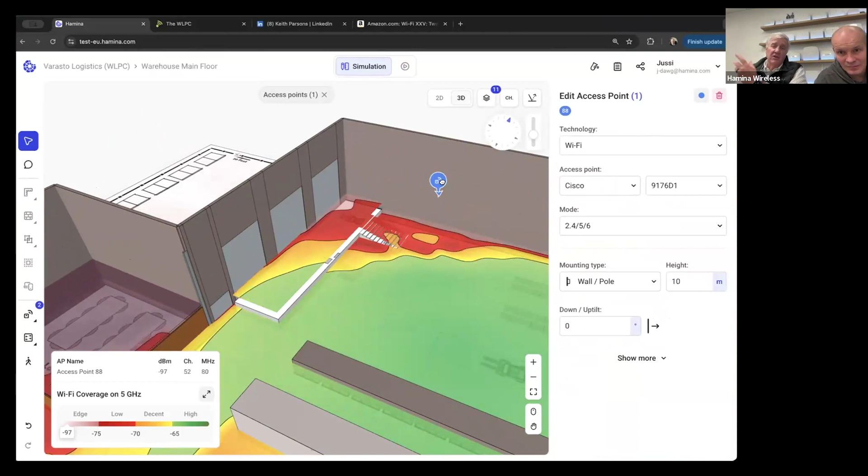I've just found if you've got forklifts in there and they can reach up to 20 feet, they will hit your APs. If it's a target, they will get it. So I like leaving them as high as possible, and that seems to solve the problem. They don't hit them as much, but you end up using directional antennas. So your cost's going to go up, but your throughput and your net result will be better Wi-Fi. And this is just a crazy tip: if you use external antennas, you will get better Wi-Fi every single time. You just have to pay a lot more money for it, and it takes a lot more design time.

So it's not that Omnis are bad. Omnis work great. Directional antennas just work better. We're controlling where the RF goes, not only where we transmit, but also where we listen. So our interference drops a bunch. On the other hand, there's a lot of features like location that just don't work at all when you use directional antennas. So yes, it's a thing and we can do them. It just has good and bad about everything.

And here's an example, it doesn't have to be an external antenna. It can be a directional internal AP these days, right? If you can get your installers to put them in right. Yeah, absolutely, that's a whole other issue. Luckily, our report on the AP list tells them exactly what angle to use, all the directions, so it's quite useful. Your installers know how to do something in plumb. But you say, I need it to go 30 degrees, and they're like, what's 30 degrees? Well, I did one recently, and luckily the vendor had degrees on the mount, so it was really useful because they just read the number from the list and moved the mount.

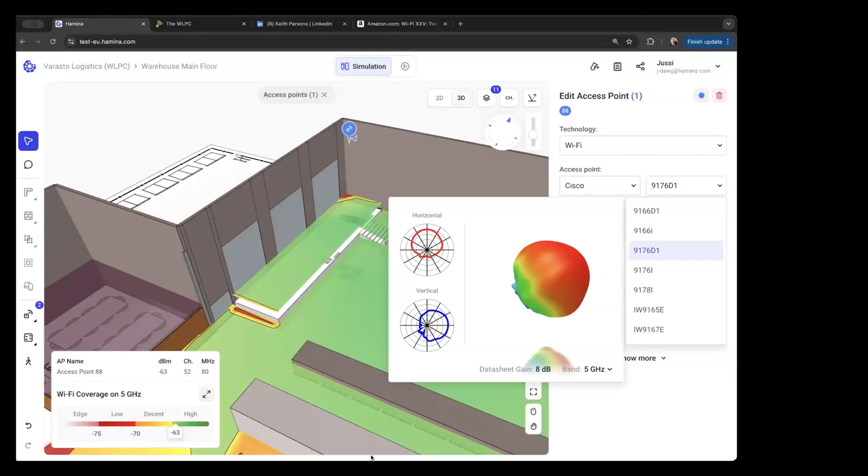Yeah, it's beauty. Real quickly, Keith's checklist for making better Wi-Fi, and some of this will be incorporated in the product in the future. But much of this you can validate through our product and through different products like Adrian Granados's Wi-Fi Explorer, especially Pro, if you have your API keys, because some of the things you need to get from the controller. Some of these you just can't get through the air, but most of them you can, if you have Wireshark, WLAN Pi, Raspberry Pi, Adrian Granados's Wi-Fi Explorer.

How dare you talk about other tools? But yes, absolutely. Wait, you already fed me dinner, so I'm good.

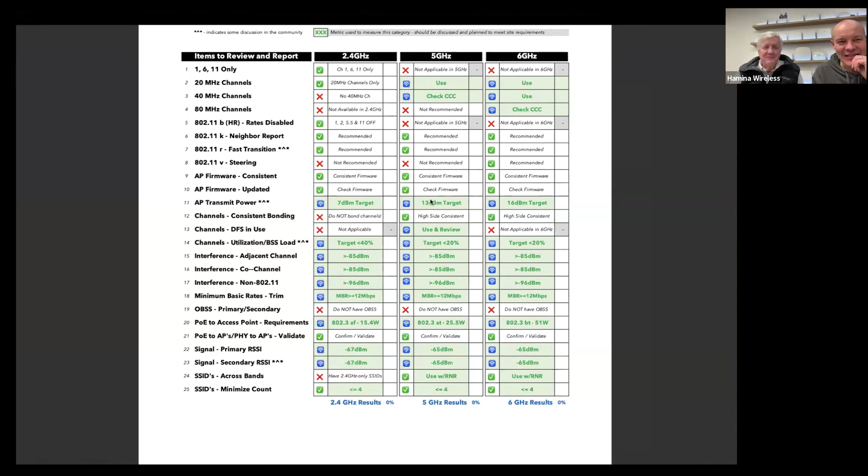What about breakfast tomorrow? Oh yeah. Yes. But here's some like really good ones, and it's hard to find. I was trying to find like controversy here, like which ones could be controversial. A little controversial, like the target.

So anything on this screen, anything that's green is a variable. Yeah. Like AP transmit power. Should you have it different in 2.4 and 5 gig? Yes. How much different? It depends. And same with your target RSSI. Exactly, especially secondary, you might live with a little bit less. Yeah. So the green boxes are things you should look at, but for the most part, things like only use channel 1, 6, and 11. Duh.

So anyway, that's what this list is. It's not the end all be all. It's just a place for you to start. I've worked with customers, and you sit with them, and you find errors very, very quickly. You can solve a lot of Wi-Fi if you just make it answer all the questions.

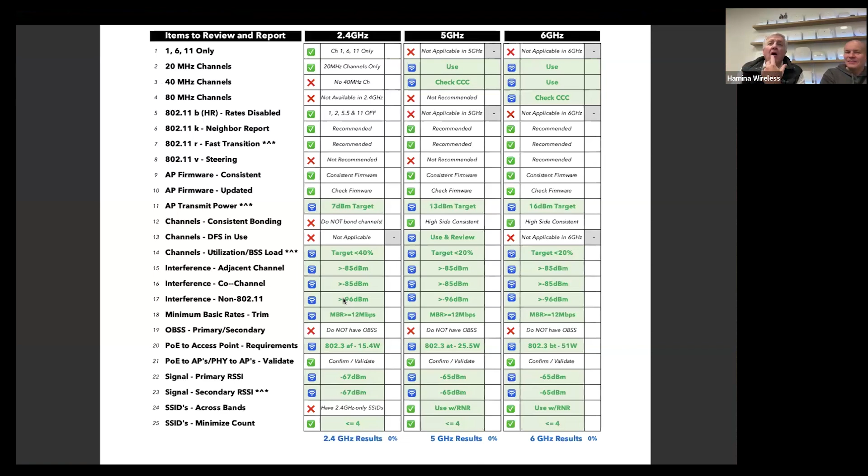Yeah, and you can actually equal that to a sprinkler or a video camera when the architect says you have to put it in the false ceiling. Well, we'll put also the video cameras in the false ceiling. They'll work great, right? And their answer is, they don't work up there. And our answer is, right, exactly.

You do have to deal with the aesthetic. It's literally electromagnetic spectrum as well, right? They're both the same thing. And it is an issue. You have to deal with them.

Architects like to drink, so you buy them...

No, the architects like to be finished sooner, and so they leave things that they don't like to the end, and they really don't like Wi-Fi. So you need to get in with architects sooner. If you can get in with them sooner, it helps a whole lot.

Plus, it helps you know where to put in the cables beforehand, because the electricians want to find out about it early. If it's a new construction, there's usually a layer for low voltage, and you just need to get in and ask for your own layer. If they're nice, they'll give you one. If they're not nice, you can piggyback on low voltage. There you go.

And there's Dan's feature request again, where he wants 2 layers or 2 images for one map, where one would be the cabling plan, for example, and the other one would be the actual floor plan, which would be a fantastic thing. It is a layer when you get the CAD. When you get PDFs, they don't give you that one. But it's a nice layer to have. It also helps in the design.

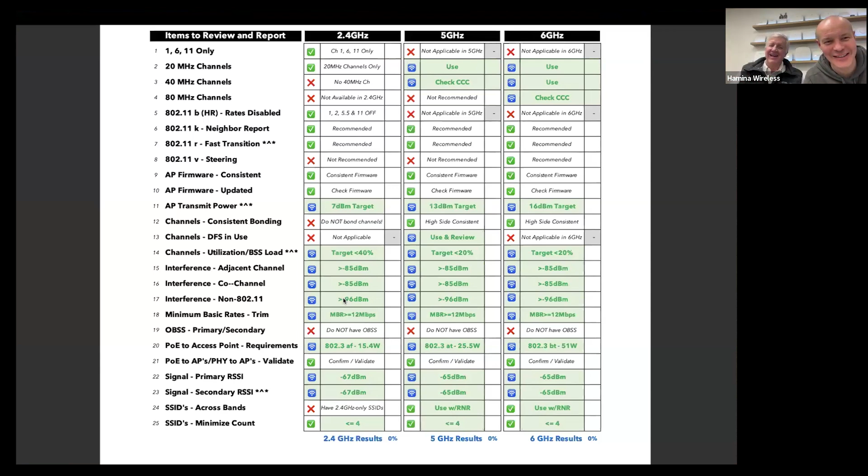And no, I don't have any energy about this at all. Active surveys available in Hamina next week. No. So that was tip number 50. That was 51.